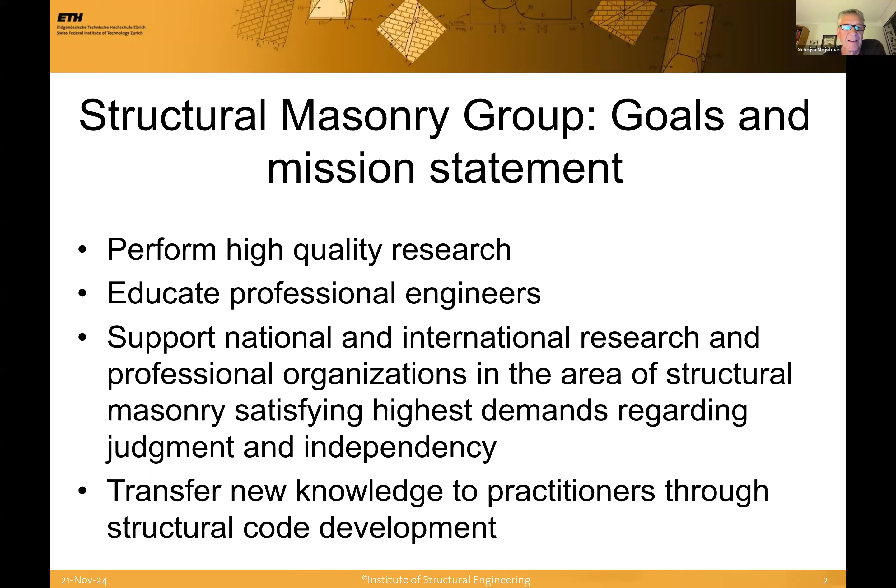And of course, after that, the idea is to transfer this knowledge to practitioners through structural code development and presentations. The major research projects done in this group are deformation capacity of structural masonry, reliability of structural masonry, hybrid testing, advanced measurement techniques, and the topic I'm going to talk about in detail: development of soft layer for seismic response modification of structural masonry.

So the idea is to apply some modification approach to unreinforced masonry structures, typical for Switzerland. About 85% of all masonry structures are unreinforced in Switzerland, because only one part in the west of the country could be earthquake prone, a little bit more than very small accelerations.

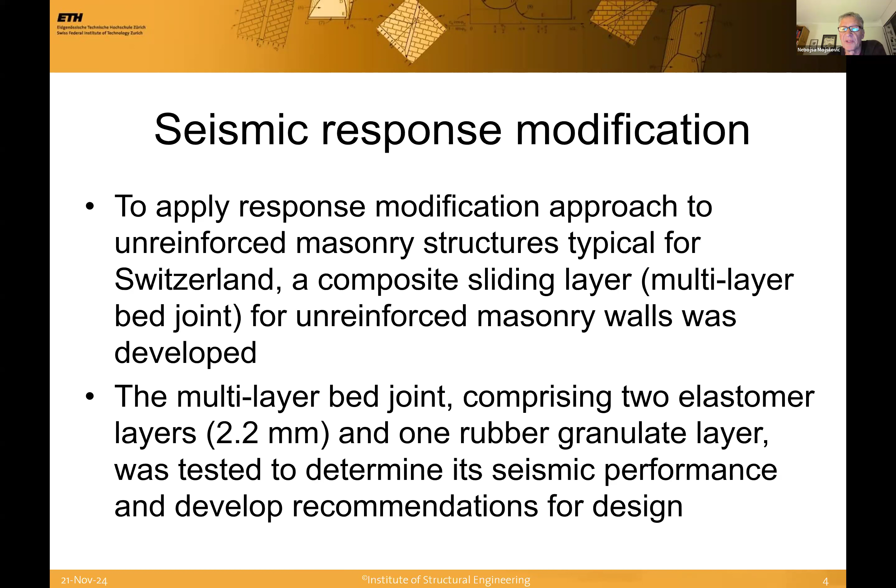So we developed a composite sliding layer, which we call a multi-layer bed joint. This multi-layer bed joint comprises two elastomer layers, 2.2 millimeters thick, and one rubber granulate layer placed between them. Then we did a lot of tests to determine the seismic performance of this layer and of course the whole structure, and tried to develop recommendations for practical design.

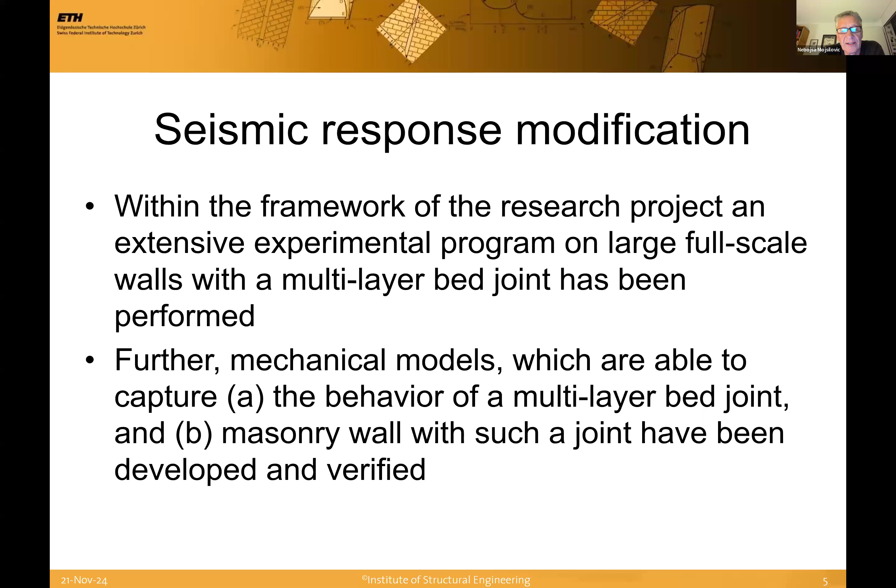We did a lot of tests on large full-scale walls, small walls, and triplets, everything you can imagine. This testing was financed by the Swiss National Science Foundation. Professor Stojadinović and myself were co-investigators. We got money for 4 years, so we were able to also develop some mechanical models that can describe the behavior of this joint and the behavior of the wall with the joint.

So now I will go into detail on this testing. I will speak about materials, the program of testing, results, discussion, and conclusions. All this can be found in a publication in Engineering Structures in 2017. Most of this work was done by Dr. Miloš Petrović, who is now working in a design company also in Switzerland.

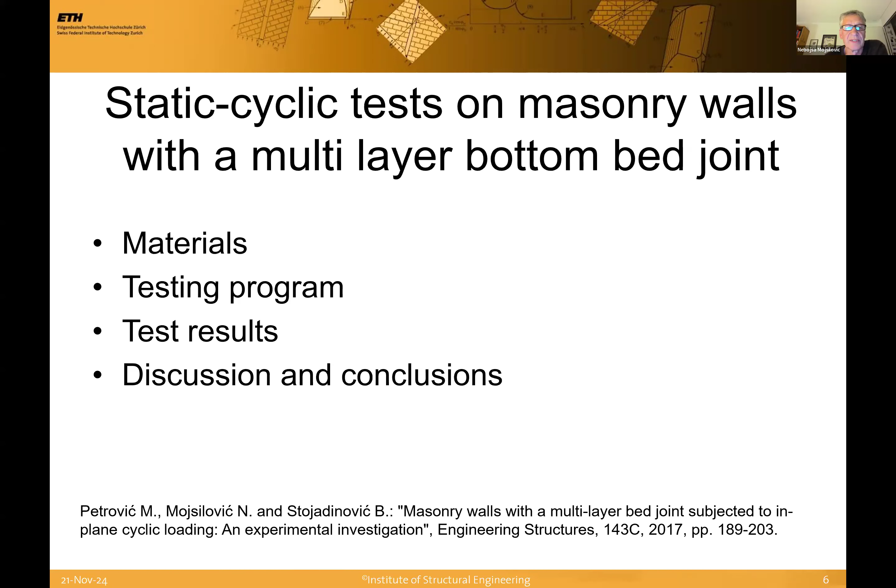The materials we used are standard clay blocks. You can see here the picture typical for Switzerland. We have about 45% void area, and clay blocks are used in maybe 80% of all applications. A small part uses calcium silicate blocks, and a very small part uses concrete blocks, used in the western part where earthquake accelerations could be larger than in other parts of Switzerland.

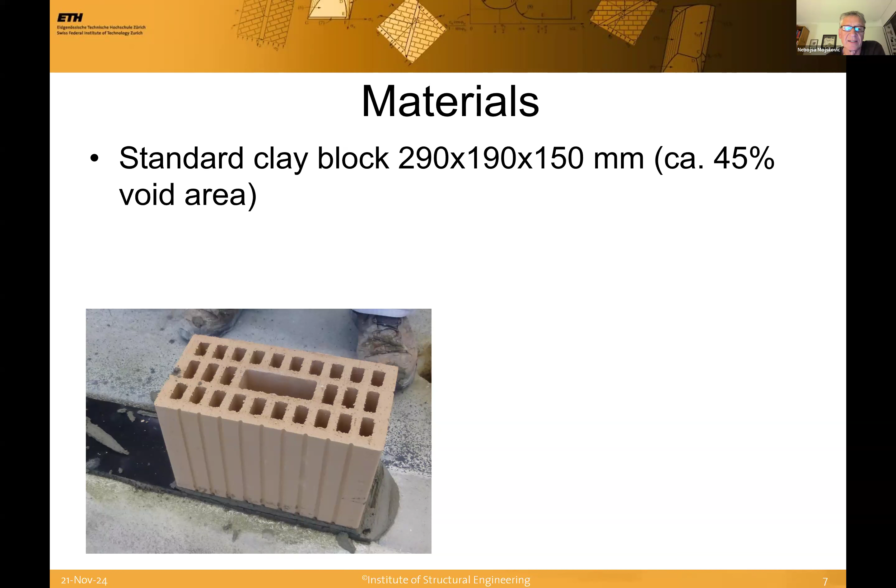Then we use standard cement mortar, always filling bed and head joints, with thickness usually 10 millimeters. In contrast to other countries in Europe, in Switzerland we use exclusively standard cement mortar, so there is no addition of weaker elements in it.

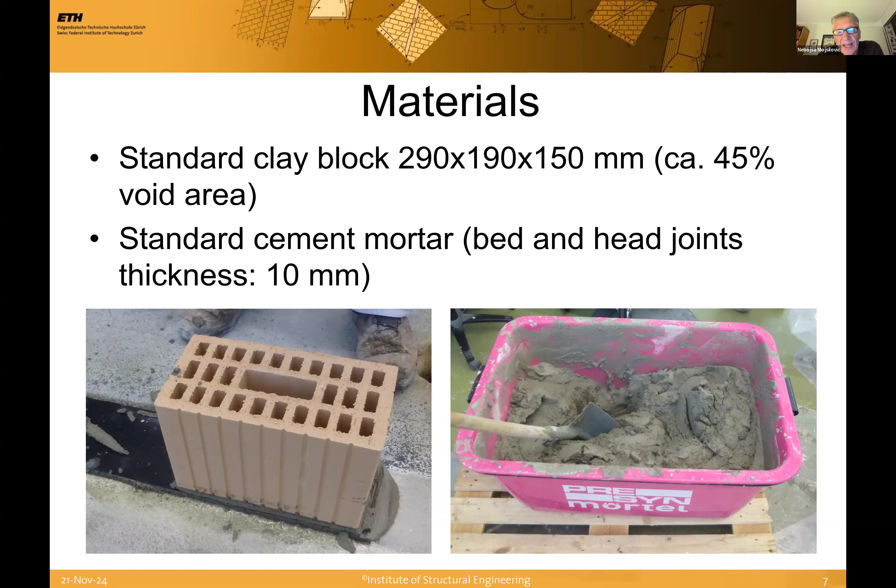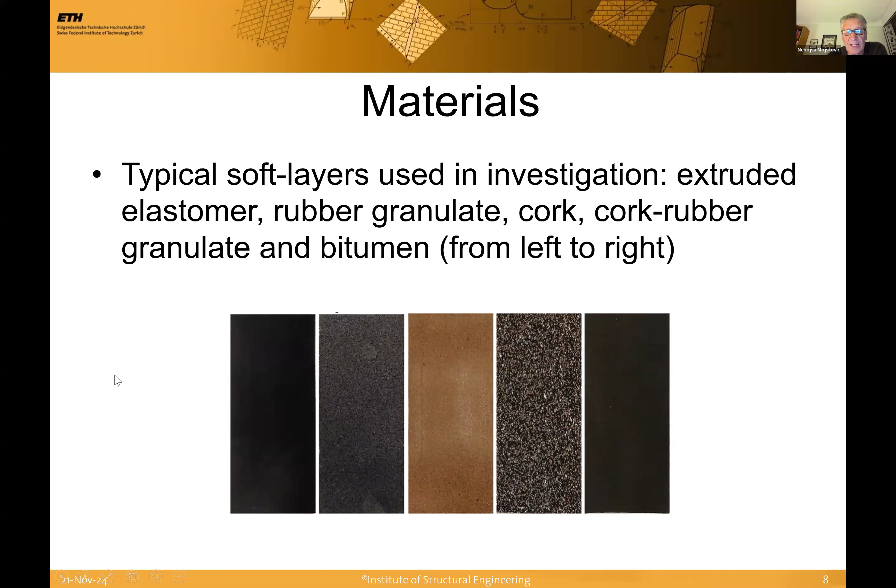So these typical soft layers that we use are, looking from left to right: extruded elastomer, then rubber granulate, then cork, then cork rubber granulate, and bitumen. So we tested all of them in order to find out which one is actually the best for our purposes.

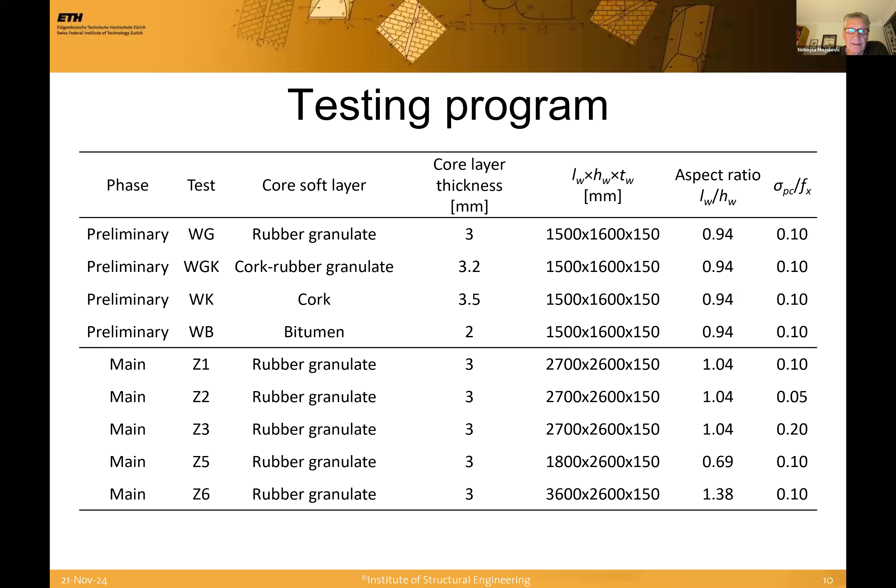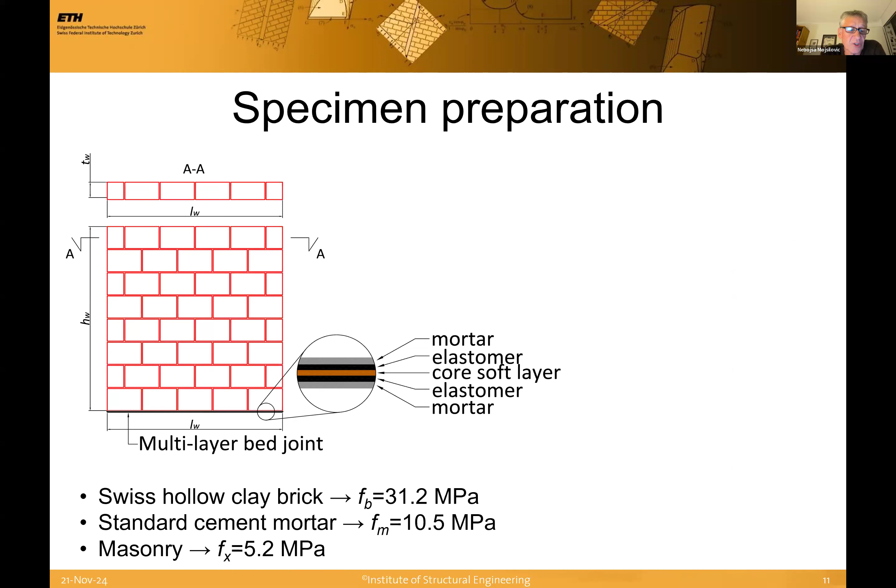So this slide is showing how we prepare these specimens. This is what we already actually seen. What is interesting here is that having a hollow clay brick, the strength of the brick was 31.2 megapascal. The strength of cement mortar was 10.5 megapascal. And at the end, one gets actually the masonry compressive strength of 5.2.

This is how this is actually done. First, you put a layer of mortar, then these 3 elastomer and core soft layer sheets, and then again mortar, and then the bricks. These are the 4 soft layers that we tested, which I already mentioned before.

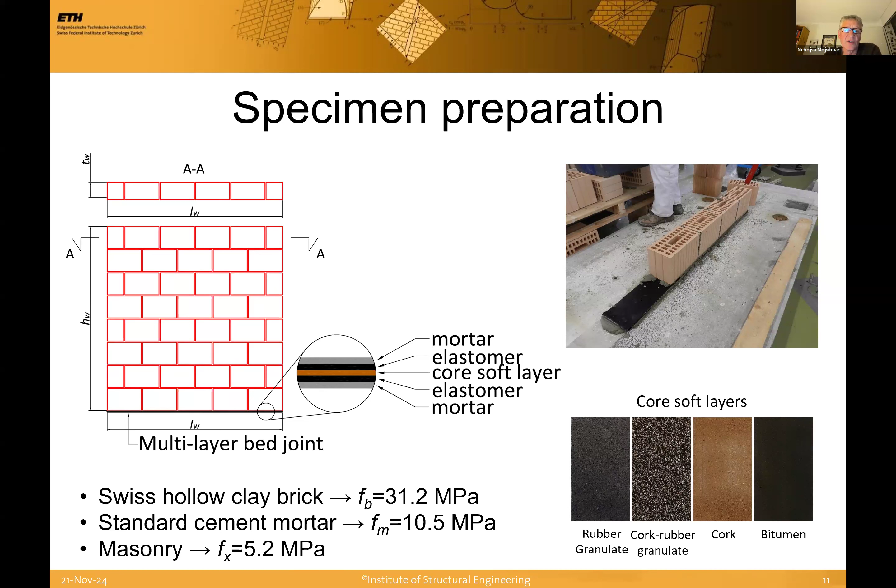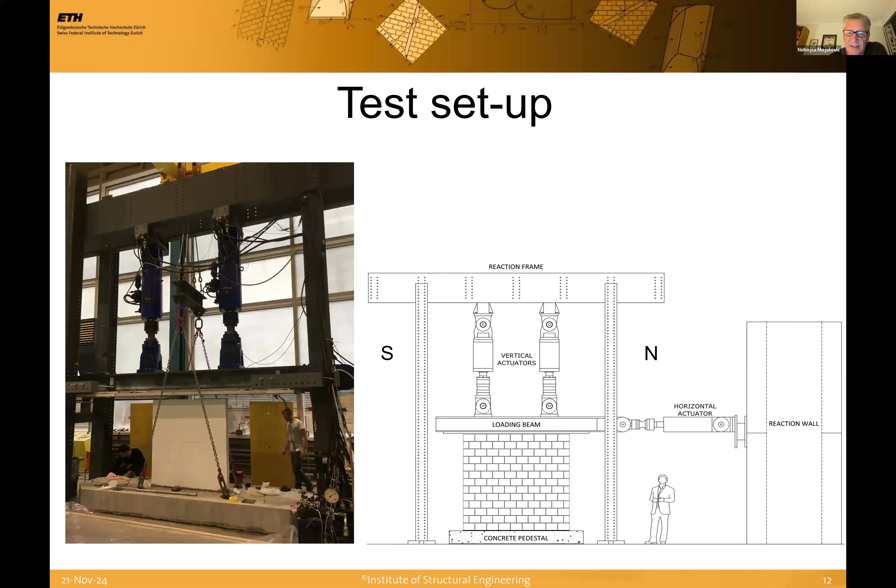So they have to equilibrate this horizontal force times the height of the wall, this bending moment. So, as I said, first we pre-compress the walls, then we introduce this static cyclic shear load that was computer-controlled displacement with a sinusoidal waveform. We introduced every step 3 times. We simulated fixed end boundary conditions, and used a two-dimensional digital image correlation measurement system to obtain the deformation field of the specimen.

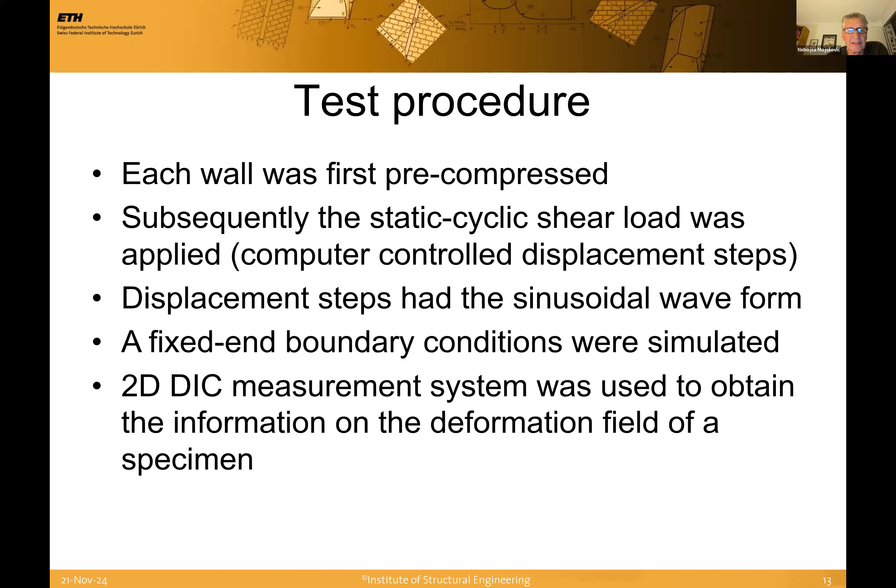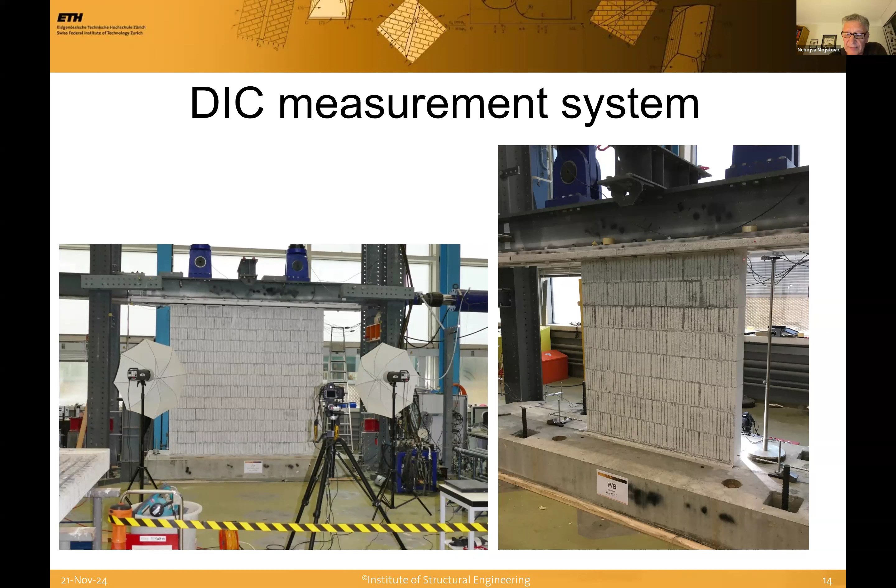So this is this DIC measurement system that we developed in-house. You have a camera, as you can see in this part here. On the left side, we have flashes, and we put some randomly distributed speckles on the wall surface, so that we can follow the change of the deformation, that means the position of these points on the photographs. You can also do the large wall with that, and also check the movement between this bed joint and the bricks. So very fine measurements can be done with this system.

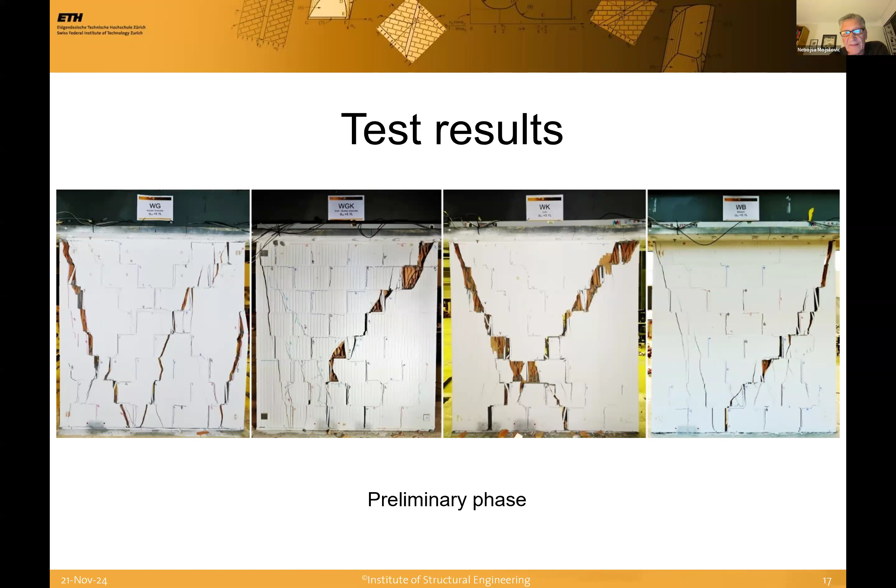Before I forget, in the framework of the other research project, we also did the same test on the same walls with the same material, but without soft layers. So we have a series of tests on the large walls, denoted as T, so we can compare them. But first go here.

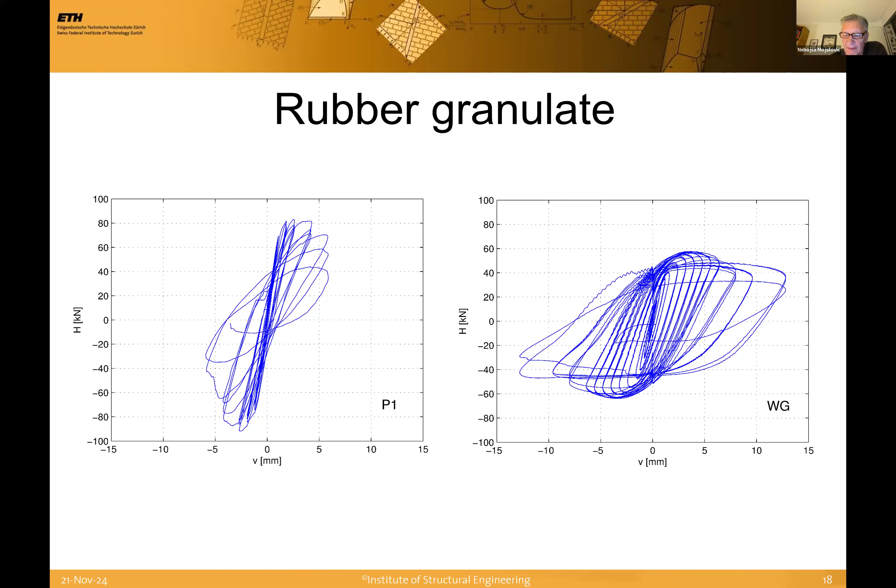So these are now the results of the main phase. As I mentioned before, we have here two series of walls. T1, for example, is the same dimension and material as Z1, but without soft layer.

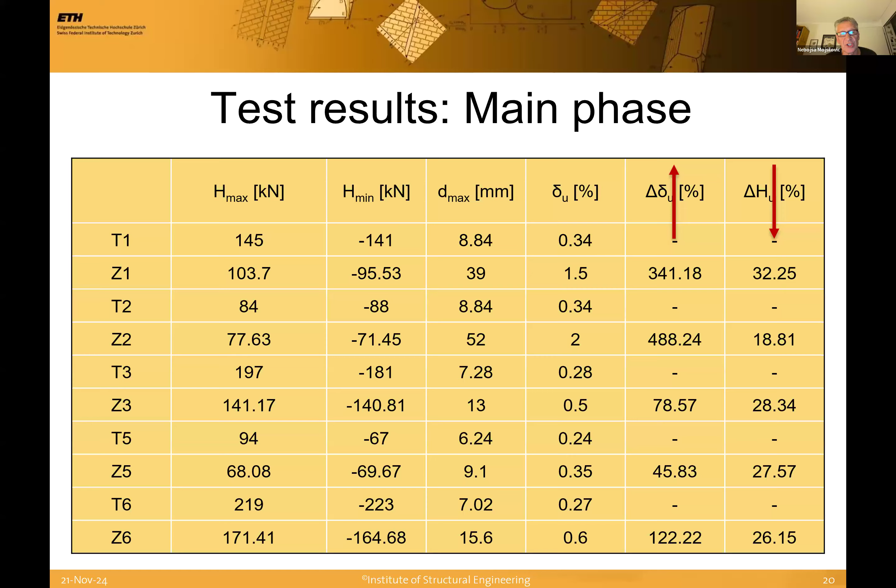So in this case also, this is going up, and the force that can be achieved is going down. That's the similar situation as before. And these are the failure modes.

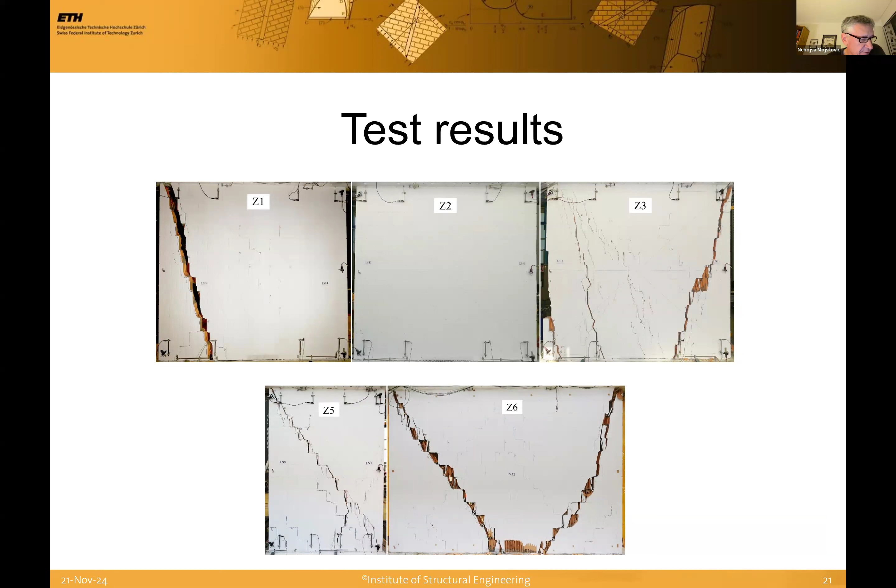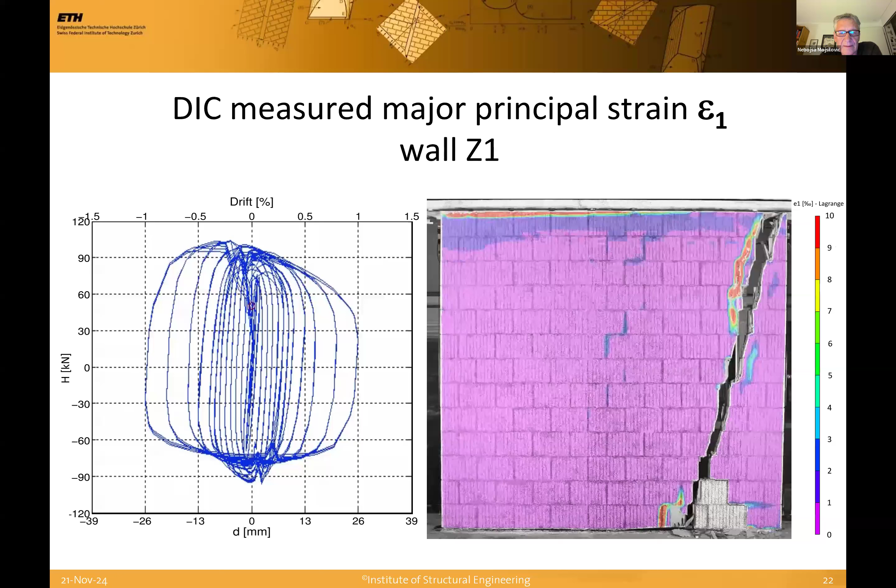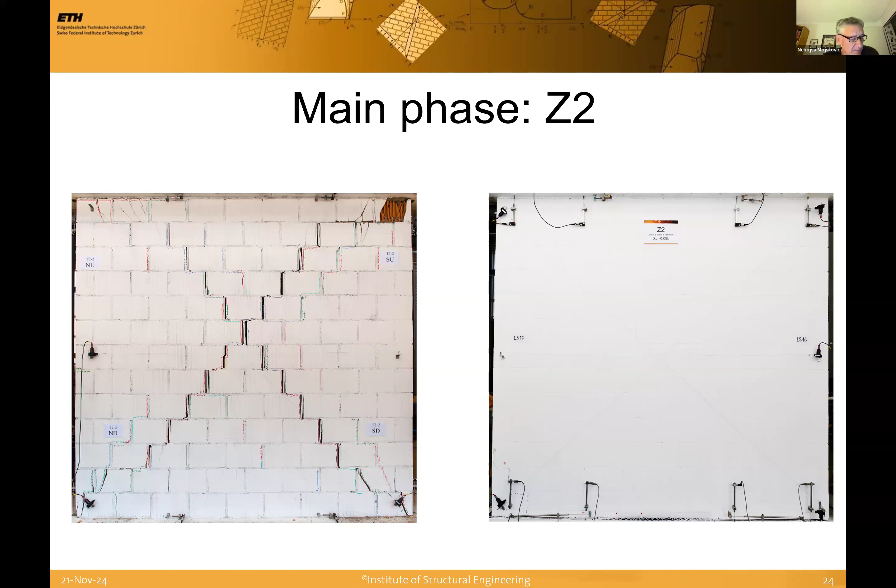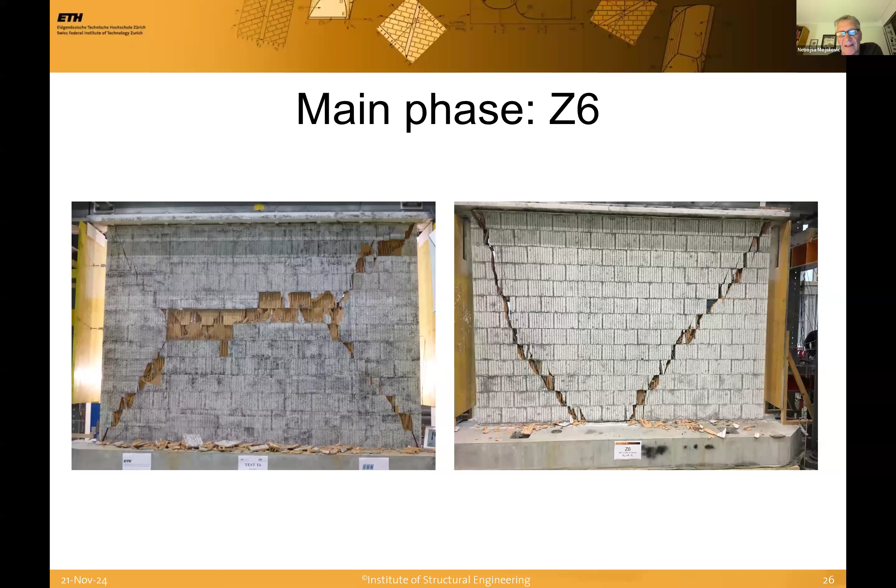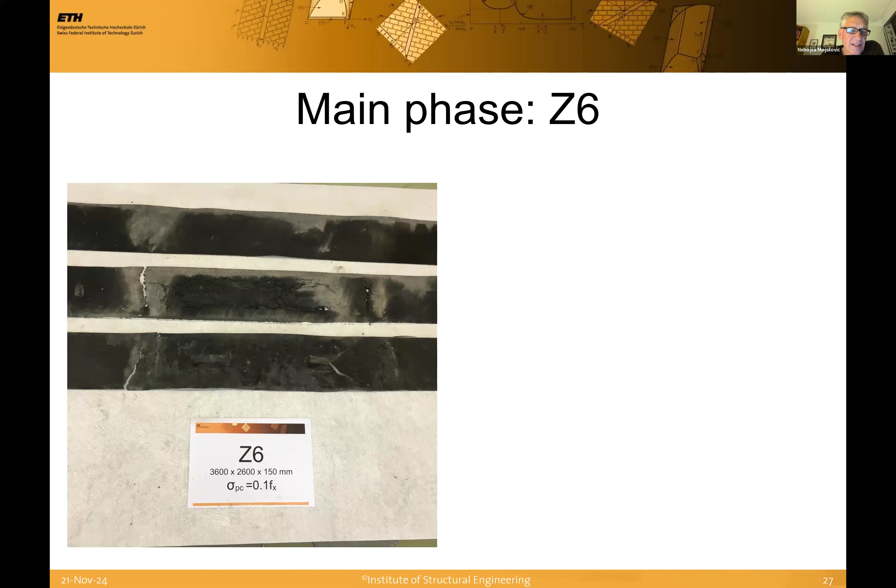When we took the wall out of the setup, we could inspect these joints, and you can see them here. The middle one is the granulate, and upper and lower are actually extruded elastomer. Here that's given in detail. So actually in this case, we also had the elastomer layer that should protect the middle one also failed here in tension.

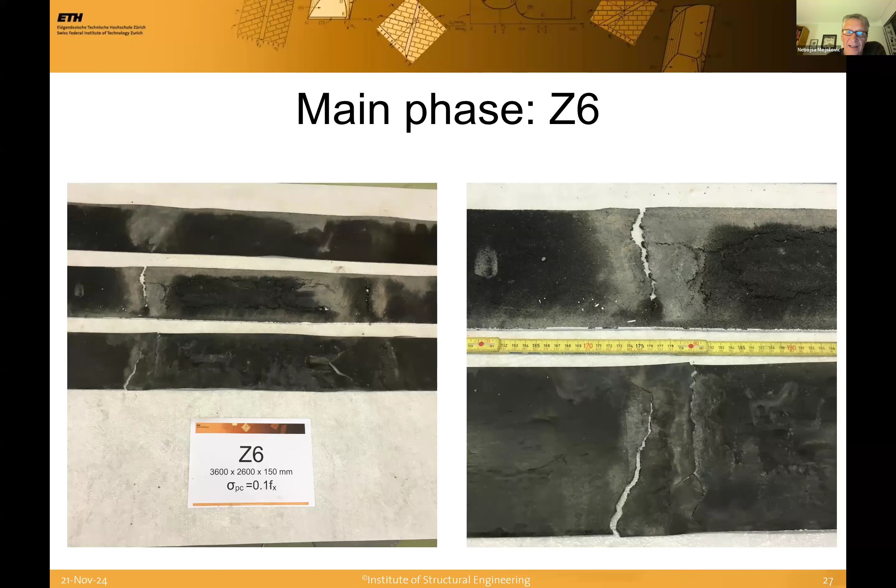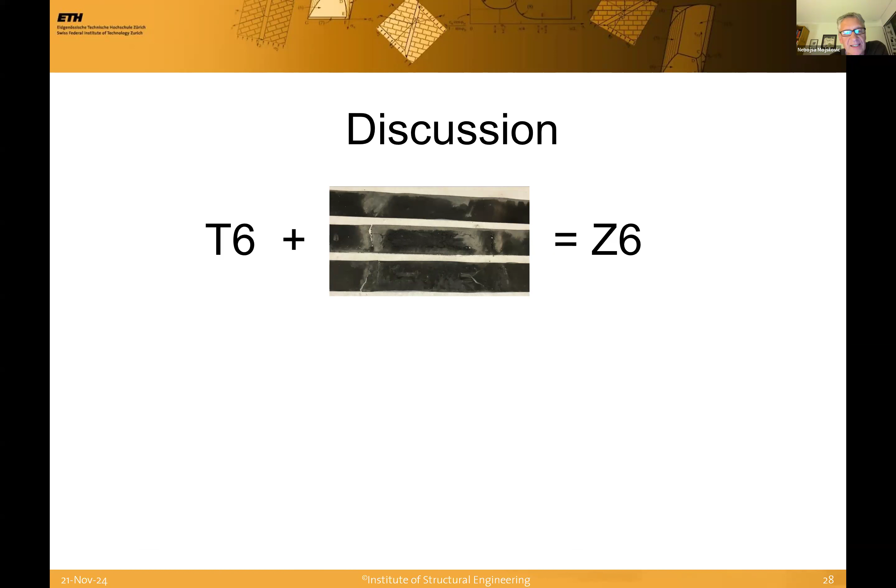So in discussion, I think this is actually a very interesting thing. When you connect the wall T6, that is without any layers, plus layers, you get wall Z6. And then instead of the system that we had, so double fixed wall, and then we have this X-type failure, when you introduce these layers, you actually get, let's say, a half of the wall T6. So that means you have fixation on the top part, and on the middle part, you have actually the horizontal joint.

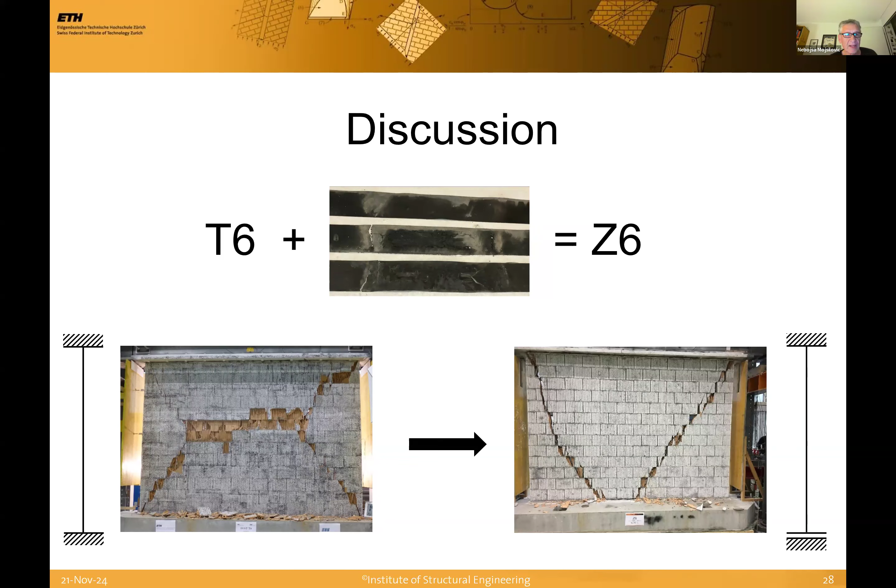The idea to do this project was that the people building in Switzerland are putting these layers as sound insulation or waterproof layers, and they don't think of them as something that is going to modify the earthquake response. So we checked all that. For example, if you check the shear strength, if you put these layers between the wall, you can get a 10 to 15% loss in the strength. So nobody took care about that. So we decided to invest our time to see what is actually happening with all that.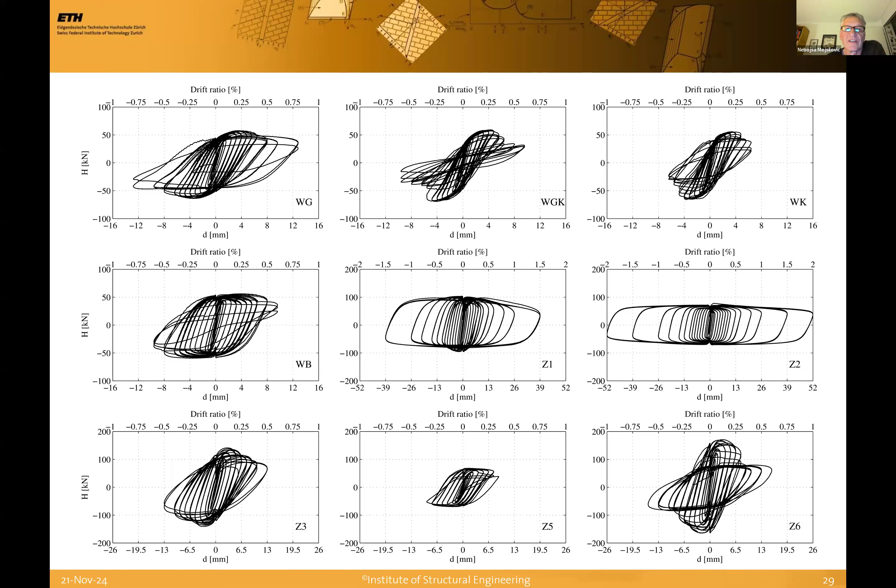This came out, which is actually very good, especially for Switzerland, where you don't have such large earthquakes. So in conclusion, we can reduce the initial stiffness by about 20 to 40%. Then we reduce the horizontal resistance by about 30%. And we increase the deformation capacity, which goes up to 6 times higher. And we can increase, of course, the energy dissipation.

In general, this seismic performance is improved in that we delay the significant strength and stiffness degradation. We enable sliding motion along the multi-layer joint. Once more, it's important that this cannot go on infinitely, but other parts of the building would stop that. And last but not least, you can enable the quasi-ductile behavior of structural masonry.

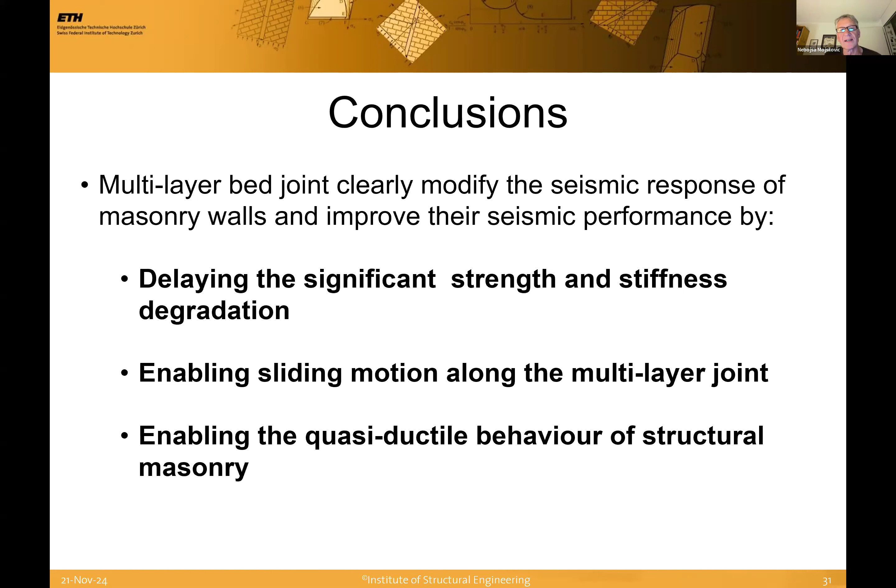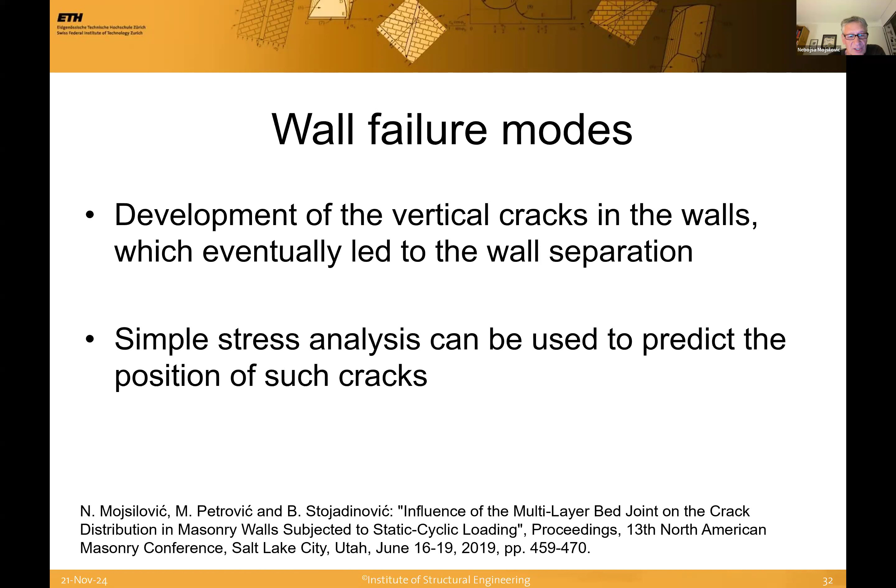So that was the part with the testing, and then we did some analytical modeling. We tried to find some model to predict the wall failure modes, meaning to see where these vertical cracks are appearing, because they eventually lead to wall separation. We used simple stress analysis and found that it can really work, which was not so expected. We start with the typical stress distribution for linear elastic behavior, because we could have the moments on the top and the bottom of the wall.

Then we have the linear distribution of the normal stresses, and we also assume that the shear stresses are parabolically distributed over the wall, which is the typical assumption that we use in linear elasticity.

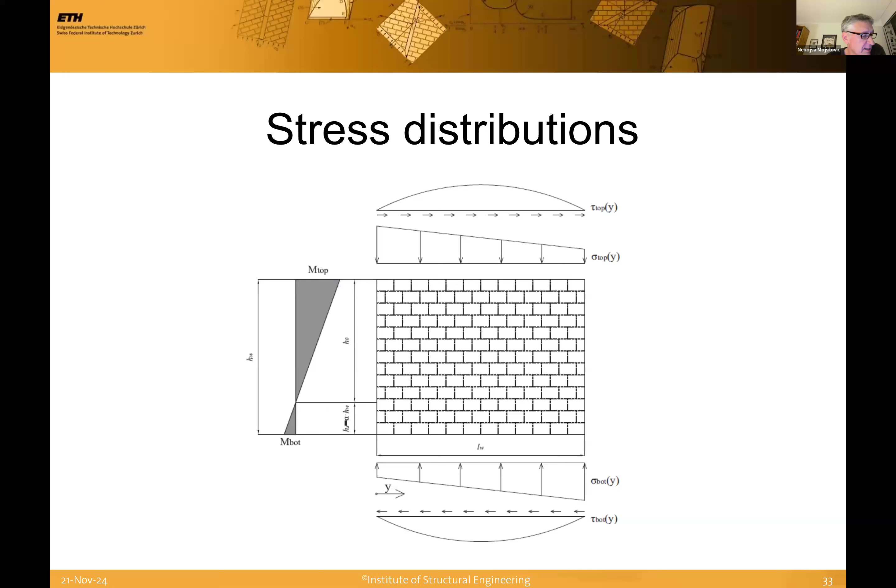So we have here the governing equations, the stresses at the bottom, the normal and shear stress are given by these equations, and when we integrate these stresses, we can get the resistance force that is denoted with R, which is a function of the position of the wall. Y is the axis that is going horizontally, and we also have demand force, which can be calculated through integration over the length of the wall. So for demand force, we integrate the stresses, and for resistance, we use cohesion and the angle of internal friction.

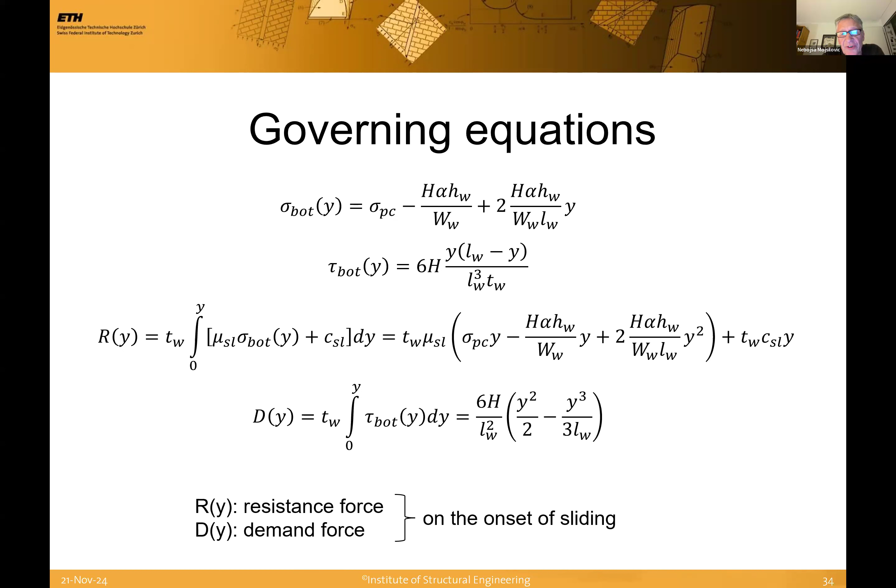When we calculate that, then we can predict where we could have these cracks. So on this diagram, the example for wall Z3, we take the movement from left to right. This is the load, the shear load direction. And at the point where the demand is larger than resistance, we should get the crack.

This is given here for wall Z3. So the tensile stress location should be between blocks 2 and 3, as can be seen from the diagram. For the compressive stress location, we get the positions between blocks 7 and 8, and 8 and 9. So that is the prediction.

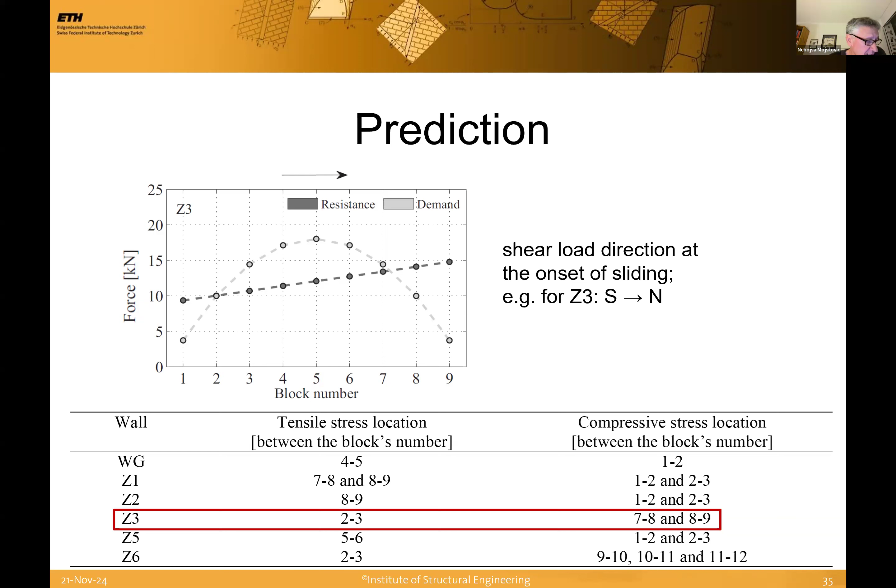And of course, we could check that using our DIC results. This is given here for walls Z2 and Z3. For wall Z2, we predict that the tensile stress location would be between blocks 8 and 9, which is actually the case, as it can be clearly seen from the DIC measurement.

For wall Z3, the tensile stress location was between blocks 2 and 3, which is also correct. The compressive stress location for wall Z3 was predicted as 7 to 8 or 8 to 9, and it was actually 7 to 8. For wall Z2, it was between blocks 1 and 2, and 2 and 3, which is not clearly seen here, but it is almost at block number 1.

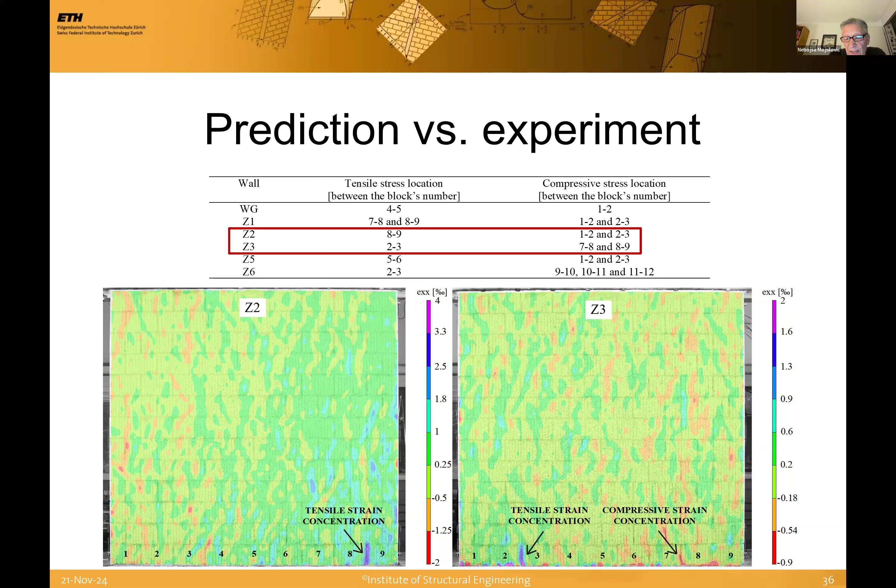So this failure mode and displacement capacity of masonry walls with a multi-layer bed joint were governed by the extent of shear and tensile vertical cracks that developed from the bottom course. The initiation and propagation of the vertical cracks eventually led to disintegration of the walls, meaning a reduction of the effective shear-transferring wall area.

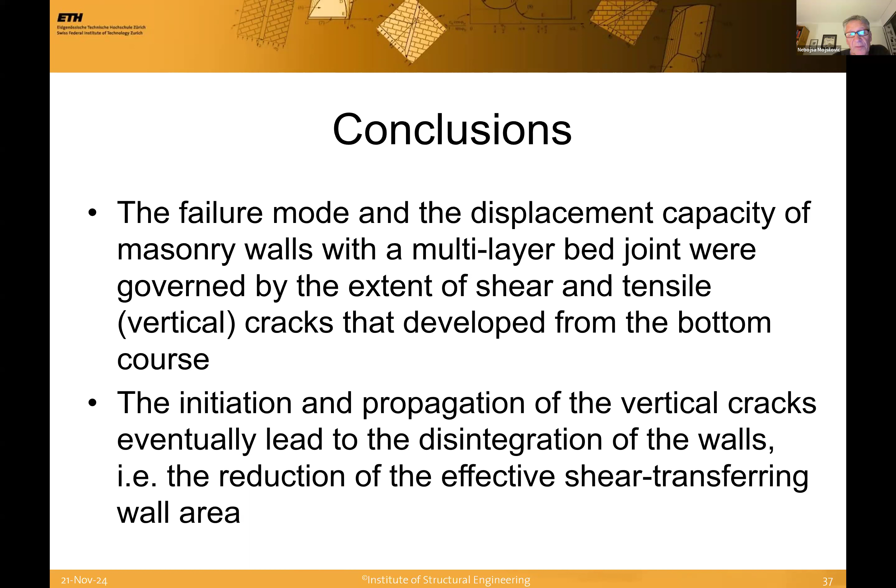So we developed a model capable of predicting the position of these cracks, and that was validated through these experiments. And this is self-explanatory, but these days it's always important to say such things.

One of the recommendations from this study is that engineers must carefully consider the distribution of the shear stress along the bottom of the wall. In my time when I was a student, nobody would say something like that, but now when I'm teaching other people, I know I have to mention this, otherwise...

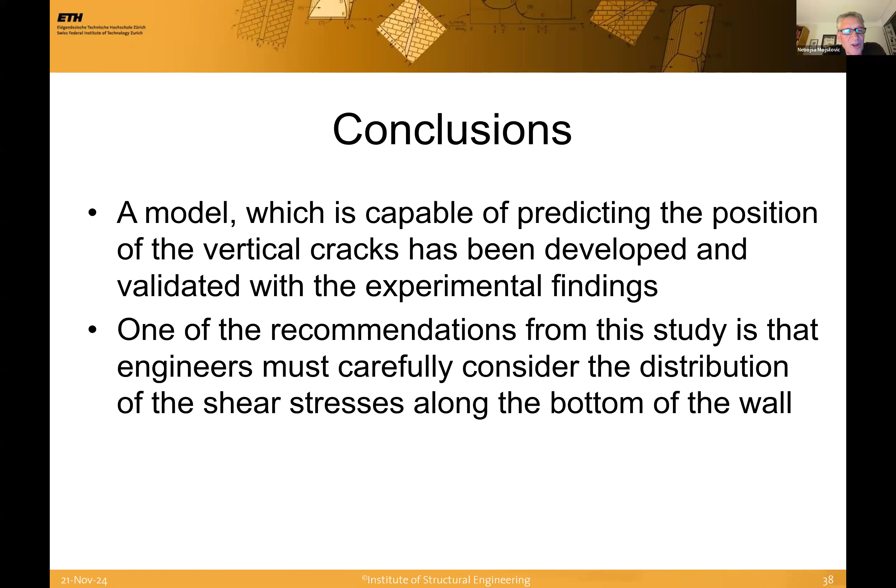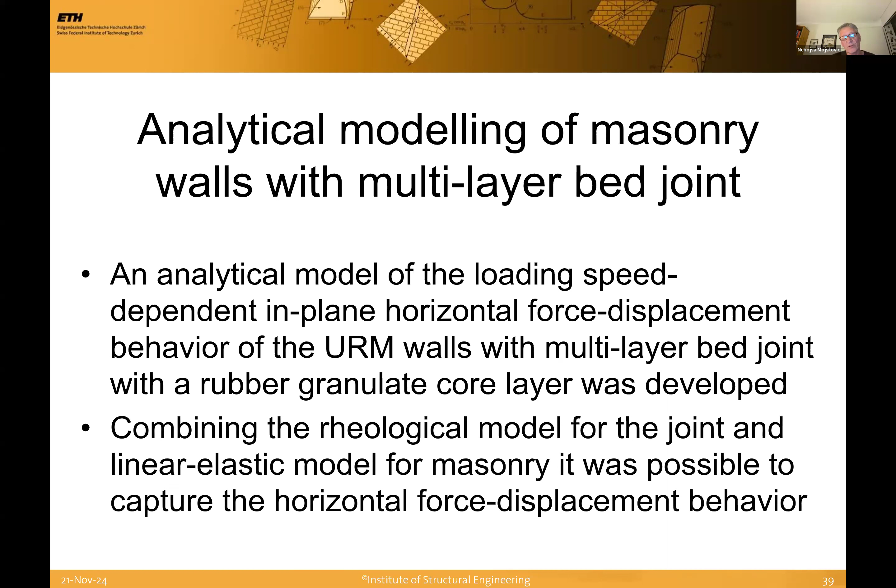After this, we did some more mechanically complicated models. First, we tried to develop an analytical model for the loading-speed-dependent in-plane horizontal force displacement behavior of the walls with multi-layer bed joint with the rubber granulate core. We combined the rheological model for the joint and the linear elastic model for the masonry, and in that way we could predict the behavior of the walls.

So this is the typical rheological model, a viscoelastic model comprising a spring, which is characterized by the shear modulus. Then on the upper part we have a dashpot, characterized by this parameter zeta, which is a loading-speed-sensitive viscosity parameter with a dimension of time. And on the lower part, we have the frictional slider, characterized by tau y, the sliding resistance.

I'm not going into detail here, but at the end you get the dependency of the shear force and slip. H is the shear force, D is the slip, and the dot is the slip rate, of course. This delta TML is actually the thickness contraction due to vertical forces.

And we also introduced this parameter psi, which actually characterizes the stiffness degradation through the cyclic testing.

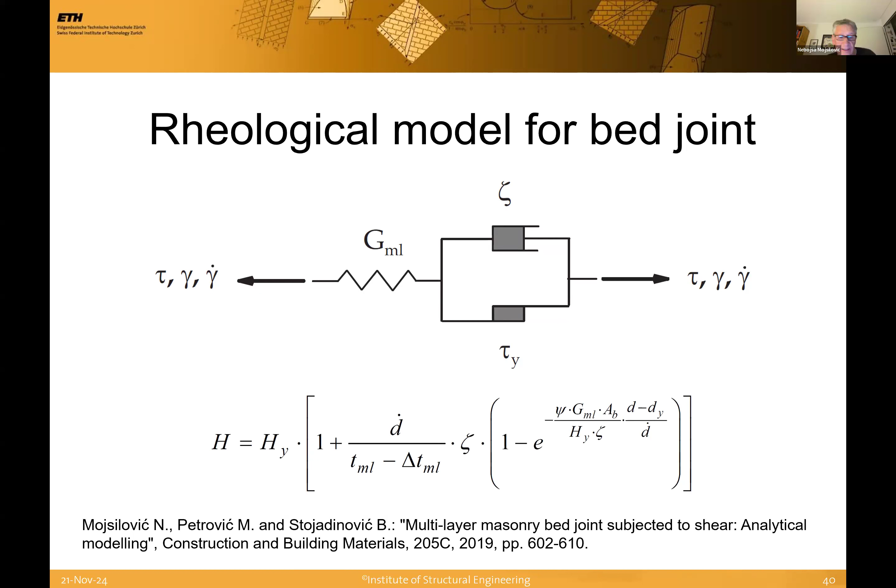The important thing is to actually see which part of deformation can be attributed to shear, to flexure, to shear of the joint, and to rocking.

And for that, we need this - not an equation, but just the definition of the elastic stiffness, K_el. We have four parts. The first part has this kappa, which is the coefficient used for the cross section, 1.2 in this case.

Then we have alpha, the zero moment position with respect to the bottom of the wall, used for the flexure part. Then for the shear of the multi-layer bed joint we have the third term, and the last one is for the rocking. And you can see in the table, the largest contribution is, as one can expect, due to the shear of the multi-layer bed joint.

So all these numbers in this table should add up to 100% at the end. I think that should be correct.

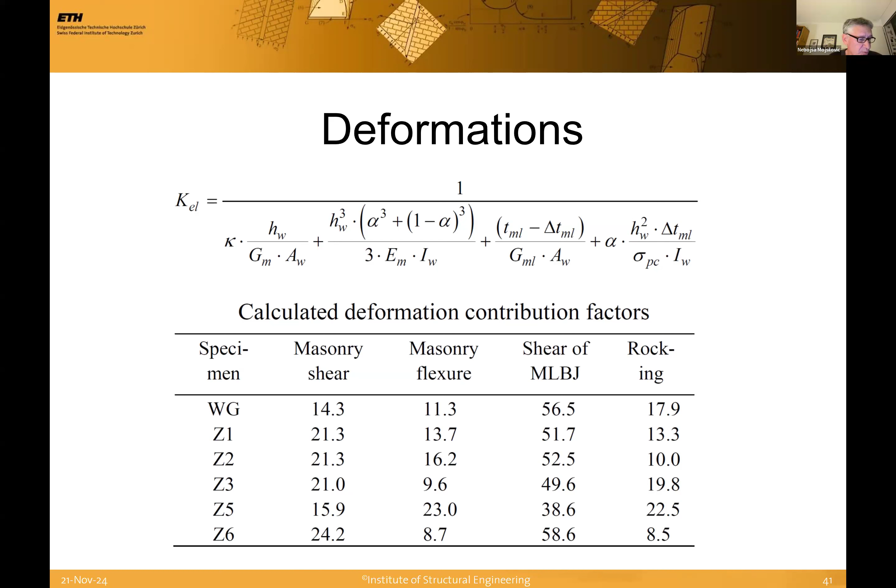So when we take care of the stiffness degradation, which is very important here, you can see on the diagram how this parameter psi 1 depends on the number of cycles. K0 is now the tangent stiffness, which is actually 1.4 times the elastic stiffness that we had before.

But now here we also introduced this stiffness degradation parameter. So it's getting a bit complicated, but all this can of course be calculated with the computer.

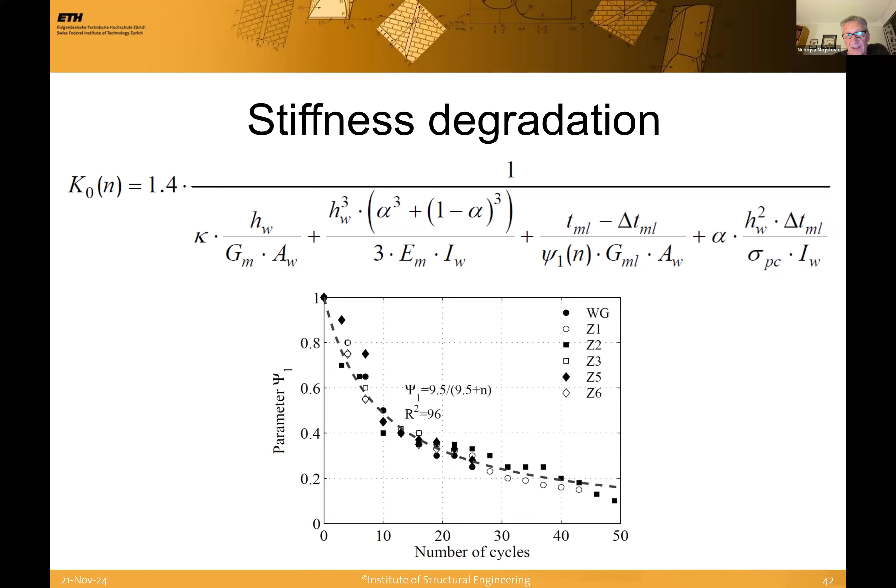This is the model we use to connect horizontal force with horizontal displacement. As you can see, we have a part that is elastic at the beginning, then we use a viscoplastic model, which can only be used for the loading path. For unloading, this model does not work - that's something we didn't succeed in developing. But anyway, I think the prediction is not so bad. For unloading, you can just take the linear elastic, and there will be some difference, but it's not so bad.

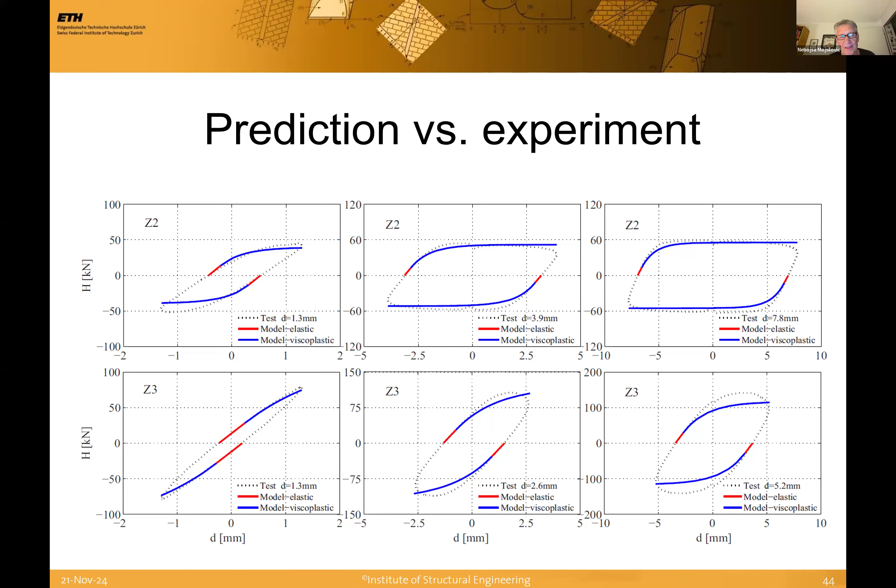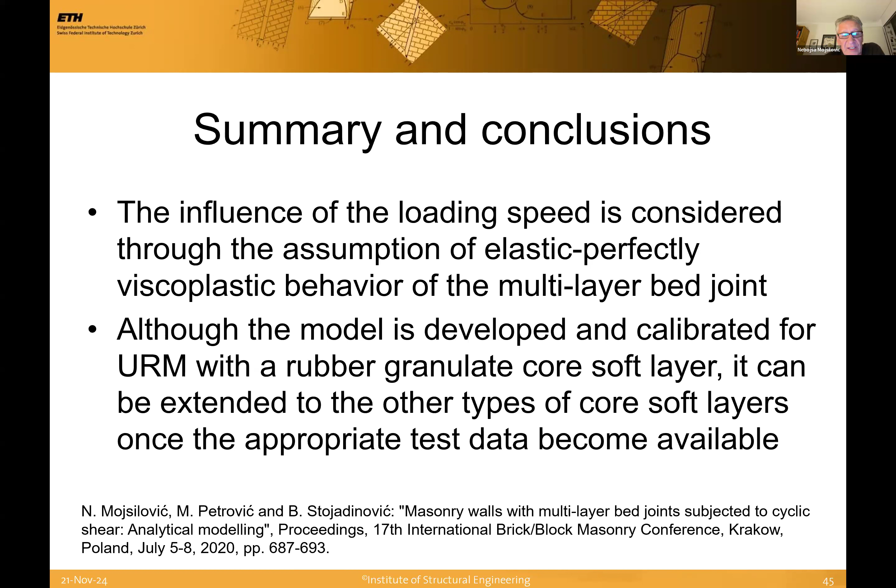In summary, the influence of loading speed is considered through the assumption of elastic-perfectly-viscoplastic behavior of the joint, the multi-layer bed joint. This model is developed and calibrated. This constant C is calibrated through the results for the multi-layer bed joint with rubber granulate core soft layer. It could also be extended if we get results for other materials that could be used as core soft layers.

So this is actually the end of the first presentation. If you have some more time, I can quickly show what we actually did in other projects, maybe two slides per project, something like that.

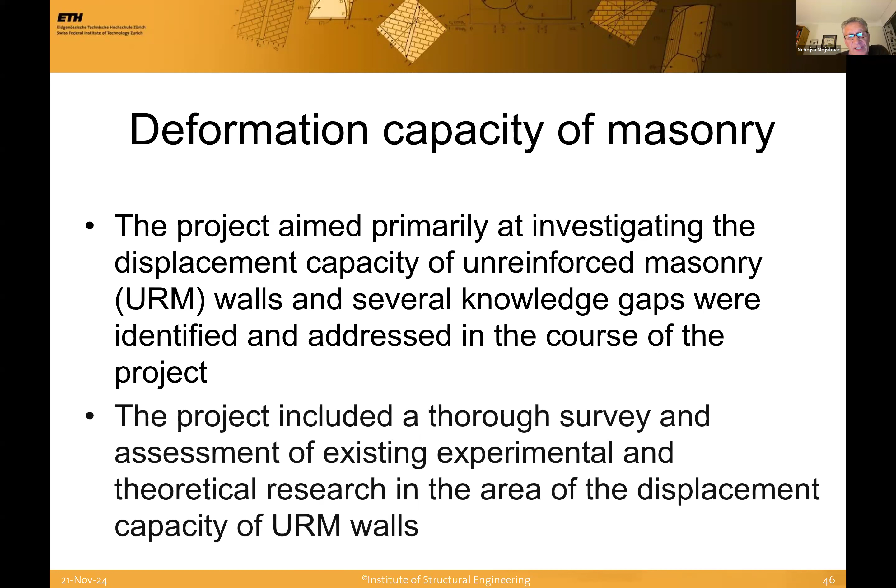The first project, also financed by the Swiss National Science Foundation, was on deformation capacity of masonry. We tried to close some knowledge gaps through this project, and we started with a survey and assessment of existing experimental and theoretical research in this area.

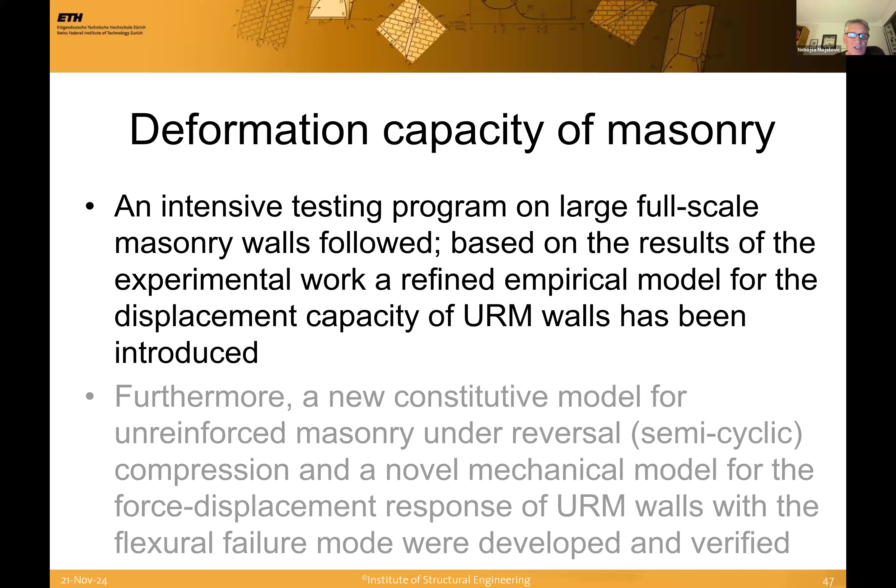Then we did a lot of tests, on big walls, small walls, small specimens, and so on. We suggested some refined empirical model to calculate the displacement capacity of unreinforced masonry walls. This is, of course, only valid for walls made with Swiss materials, because that's what we tested. We also developed some new constitutive model for unreinforced masonry under semi-cyclic compression, and some mechanical model for the force-displacement response with the flexure failure mode.

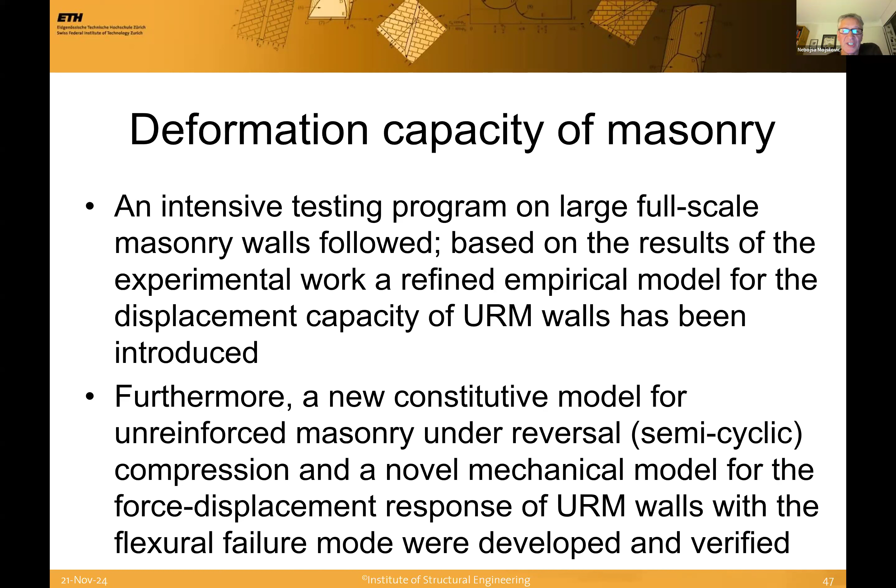What we didn't succeed in here is developing a model for shear failure, and to my knowledge, that is still an open problem. Also in this case, I don't want to go into details. What I want to pick up from this project are some interesting things I call the beauty of nature's laws.

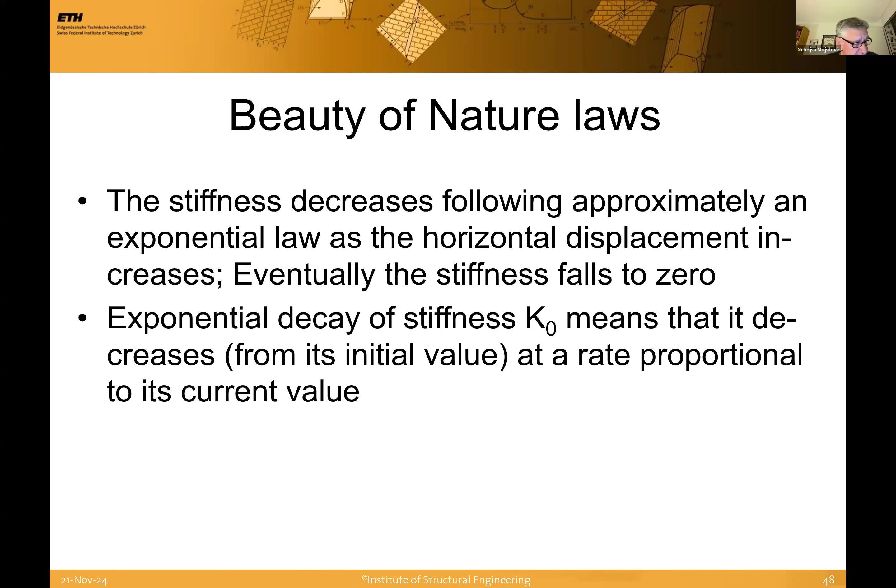What we found out is that the stiffness during this cyclic loading decreases following approximately an exponential law, and eventually this stiffness falls to zero. This exponential decay of the stiffness, K0 being the stiffness at the beginning of the test, means that the stiffness decreases from its initial value at a rate proportional to its current value. We can write the differential equation and integrate it. λ here is the exponential decay constant, and K0 is the initial value, which we can get from the results. When we put that in diagrams, we can see it's actually a very good prediction.

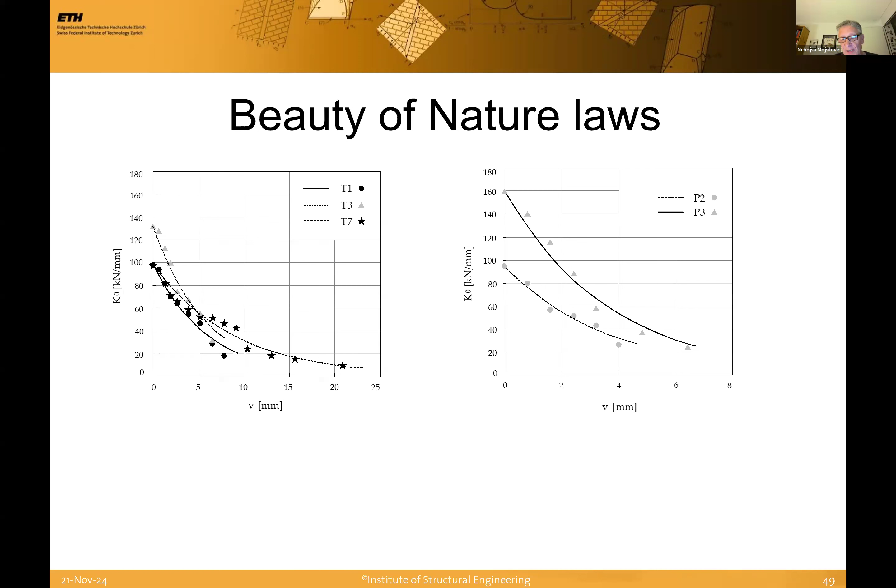Of course that's just a numerical thing, but what is interesting is that similar decay processes occur in nature, for example radioactive decay, and also in engineering sciences, for example vibrational decay in damped oscillators. All these processes can be described with this same differential equation.

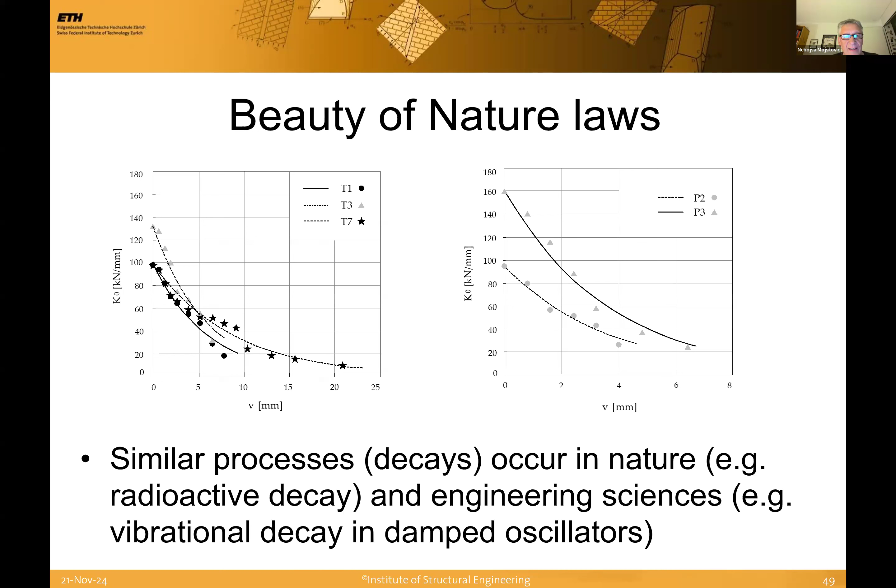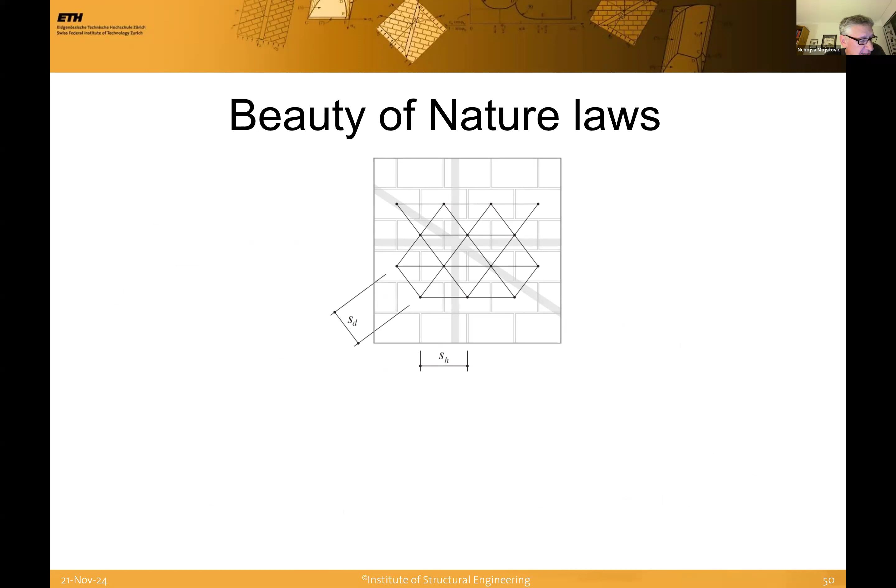The second thing we noticed and used: this is a typical measurement mesh for a small specimen, made of triangles, and we measure the changes in distance between these net nodes. In order to correct measurement errors, which are always present, the analogy between the principle of minimum sum of squared errors and the minimum of elastic strain energy was used.

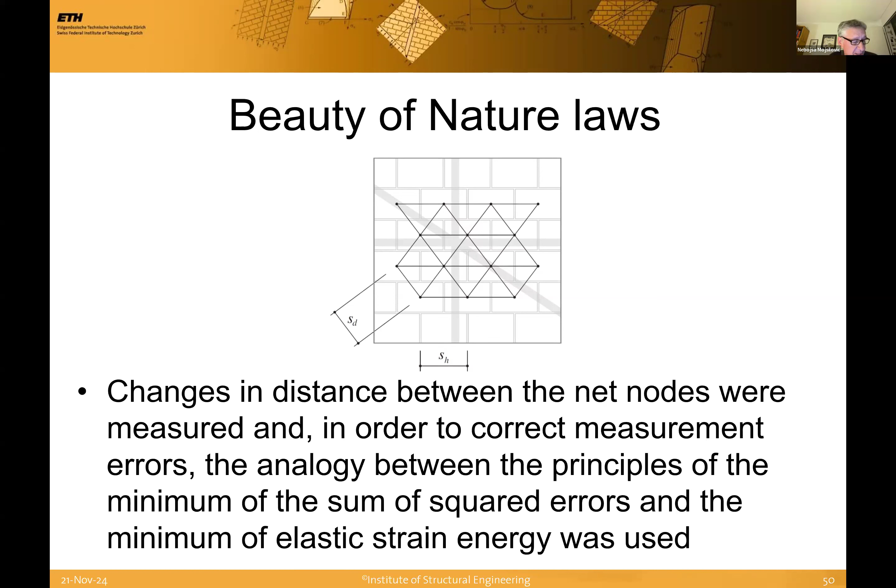And this is how it can be done. We can use standard finite element software where the measurement net was modeled as statically indeterminate plane truss - if it's not statically indeterminate, it won't work. The truss members' length changes were applied as a loading, and in this way the nodal displacement could be obtained. Of course, you have to put some supports, otherwise that won't work. So it's relative to these supports that we choose.

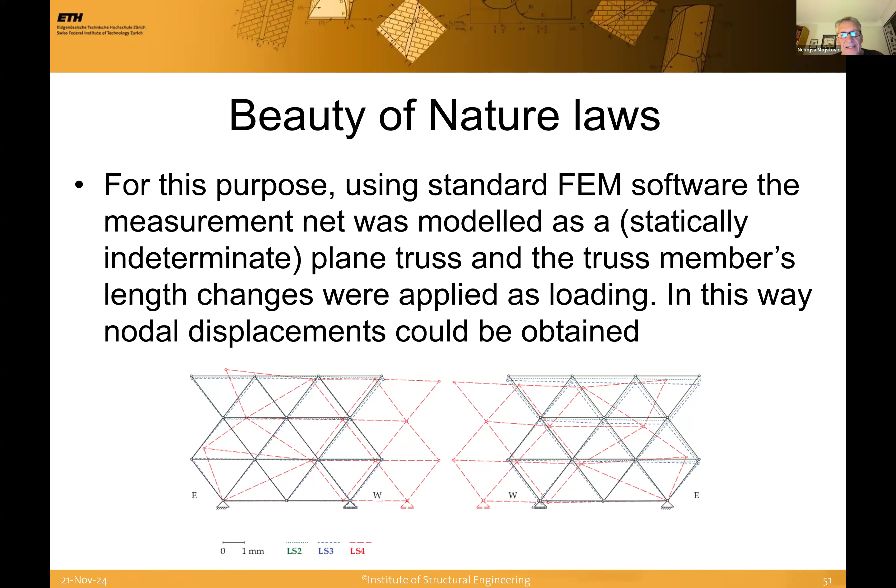The next thing that could be interesting is the reliability of structural masonry, and our group was doing that for a long period of time. So we firstly developed a probabilistic model framework for design of masonry. Then we used Bayesian assessment of the compressive strength for the masonry. We checked the probability and structural reliability assessment of mortar joint thicknesses in load-bearing masonry, and we also investigated the influence of workmanship on the compressive strength of structural masonry.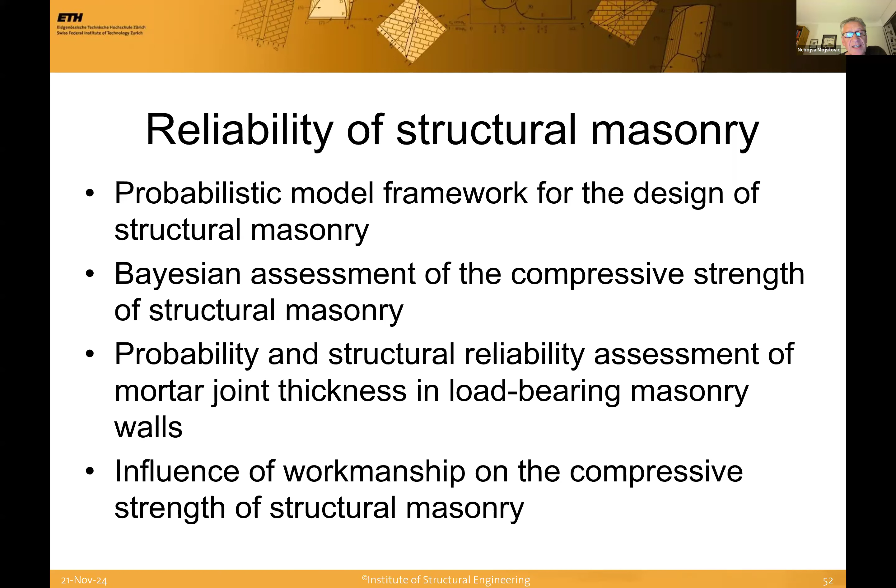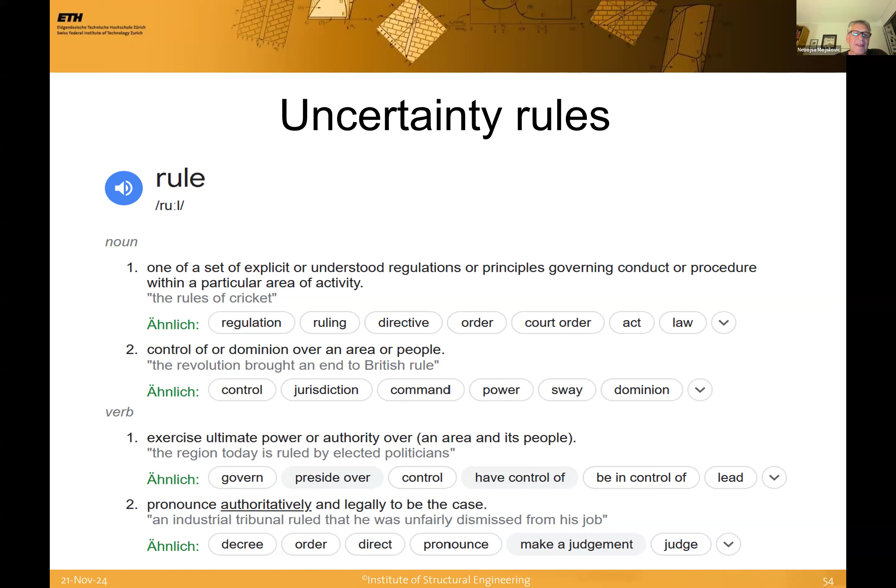So the other thing we found out is what uncertainty can do, or how uncertainty can change the behavior of the masonry. I just titled it Uncertainty Rules - rules meaning the first explanation from the verb: exercise ultimate power or authority. And that means the following.

As part of the structural masonry course, which I did in Zurich, during one lecture of about 1.5 hours, the students are divided into small groups and they build some typical specimens. At the same time, we have two professional masons who instruct and help students during the exercise, and they also build one specimen.

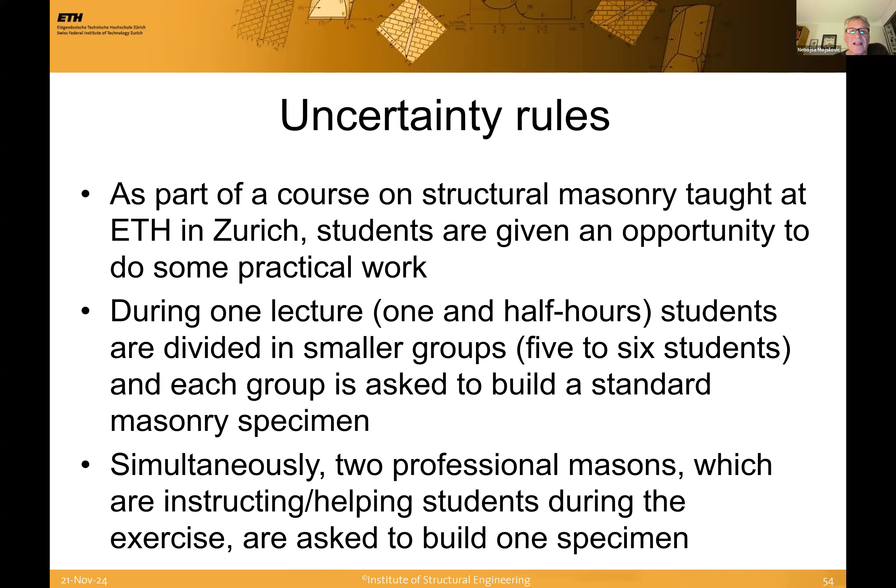After 4 weeks we test that, and these are the results of these tests for actually 11 years, from 2007 to 2017, and these walls were mostly clay block masonry. You can see in this diagram the values achieved by masons.

With the gray color, and others are the students' results. Depending on the year, at the beginning there were not so many students, so we have a smaller number of specimens. Then in years 2015 and 2016 we have really a lot of students, and then we have, of course, a lot of specimens.

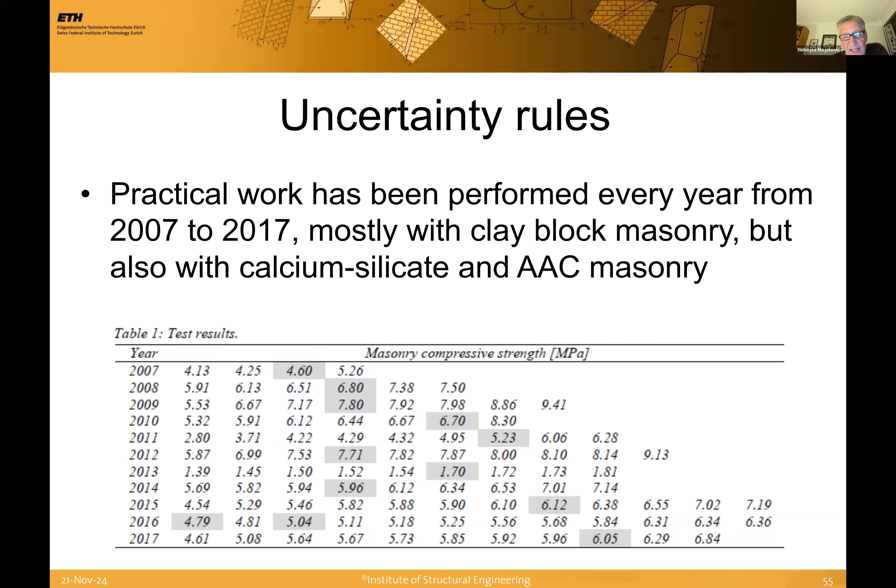And what is interesting here is that the specimens built by students sometimes actually get higher strength than what the masons are doing.

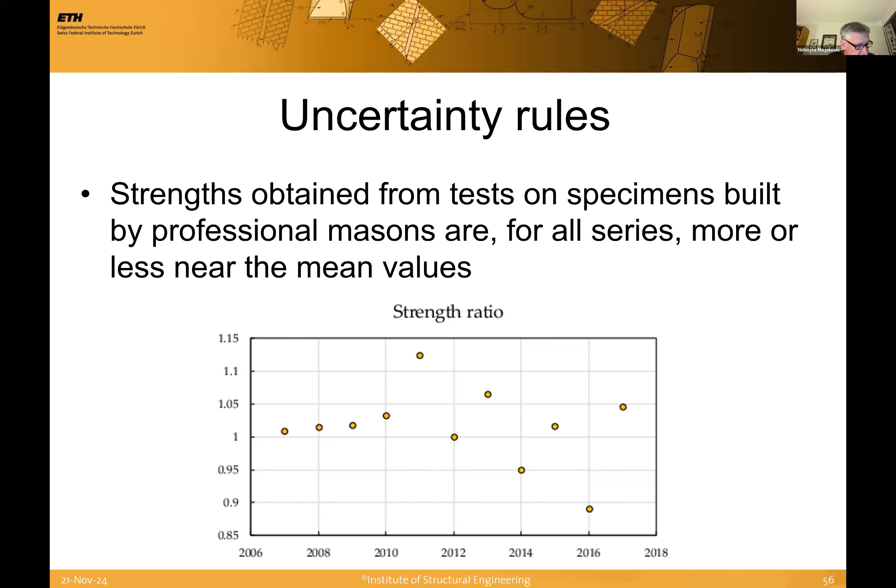So this is the comparison, the strength ratio, between the values of the walls built by masons divided by the sample mean. It is more or less between 0.9 and 1.1. That means the strength of walls built by the masons was almost equal to the average value of those built by students. In the course of these 11 years, professional masons could not outperform unskilled students.

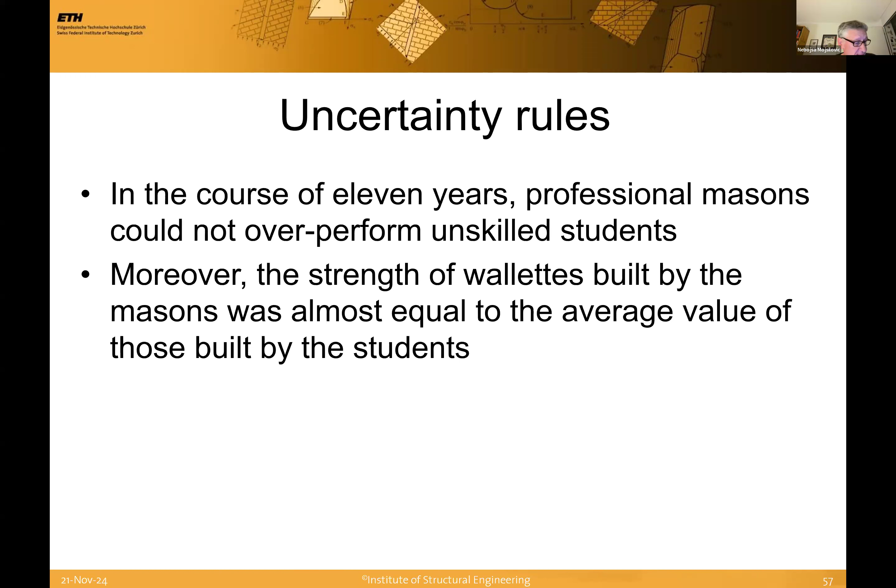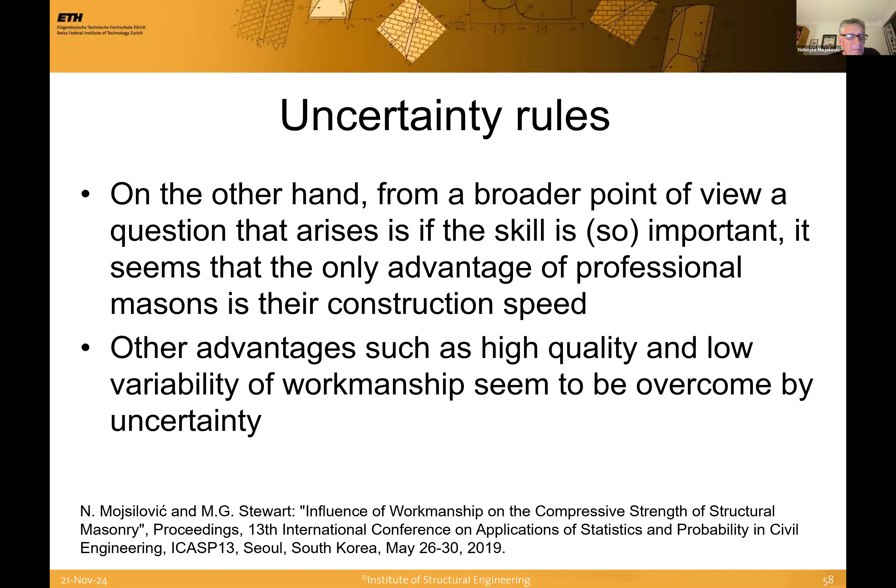One possible explanation for such an outcome could be that professional masons are more consistent in their work, and thus their values are always in the middle. On the other hand, from a broader point of view, the question arises whether skill is so important. It seems that the only advantage of professional masons is their construction speed. Other advantages, such as high quality and low variability of workmanship, seem to be overcome by uncertainty. This is a very interesting thing.

I have only 3 slides left, telling something about hybrid testing. I suppose you know what hybrid testing is - we did that also in some, let's say, two smaller projects in our lab and also theoretically.

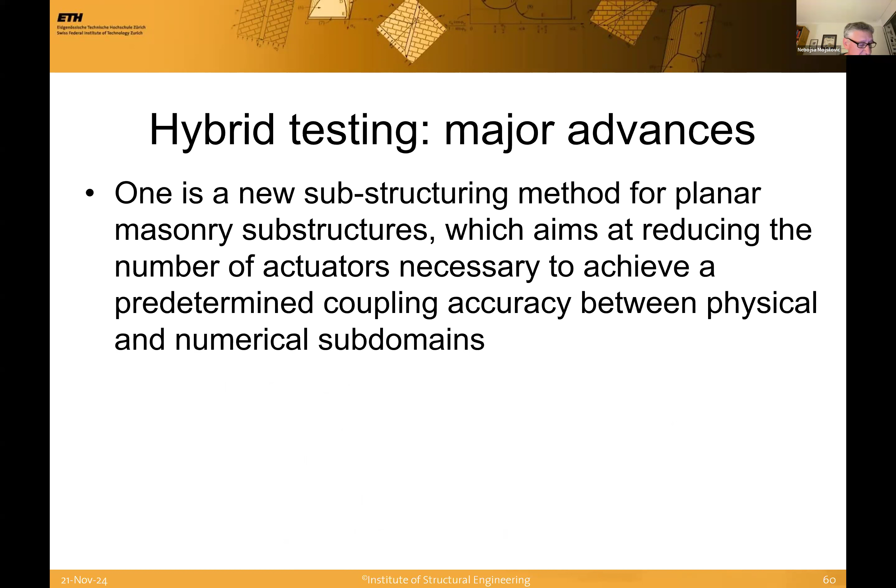And what we found out is that there was a new substructuring method for planar masonry substructures developed, and this aims to just reduce the number of actuators necessary to achieve predetermined coupling accuracy between physical and numerical subdomains. So that was the purely theoretical work, and we also did some testing.

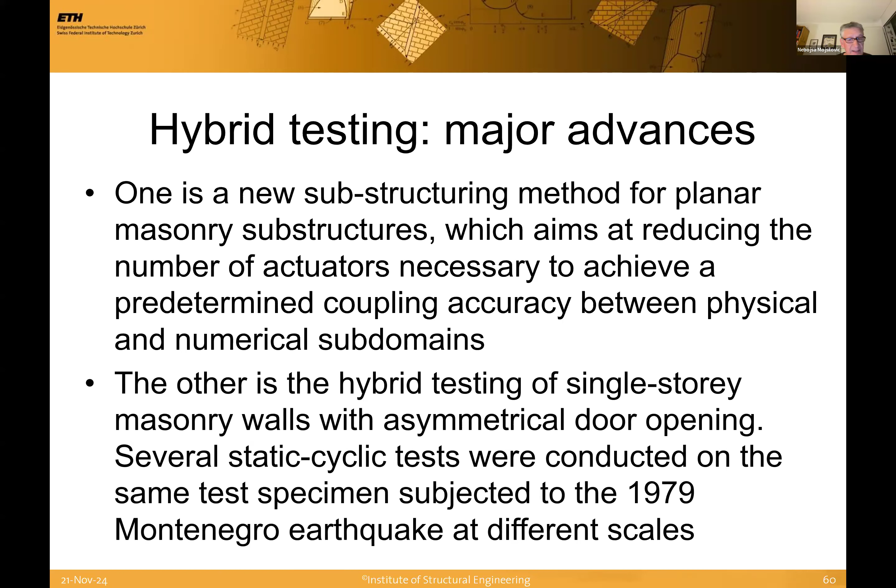We did a hybrid testing of a single-story masonry wall with an asymmetric door opening. We tested it several times on the same test specimen, subjecting it to the 1979 Montenegro earthquake at different scales. This is the isometric picture of the wall.

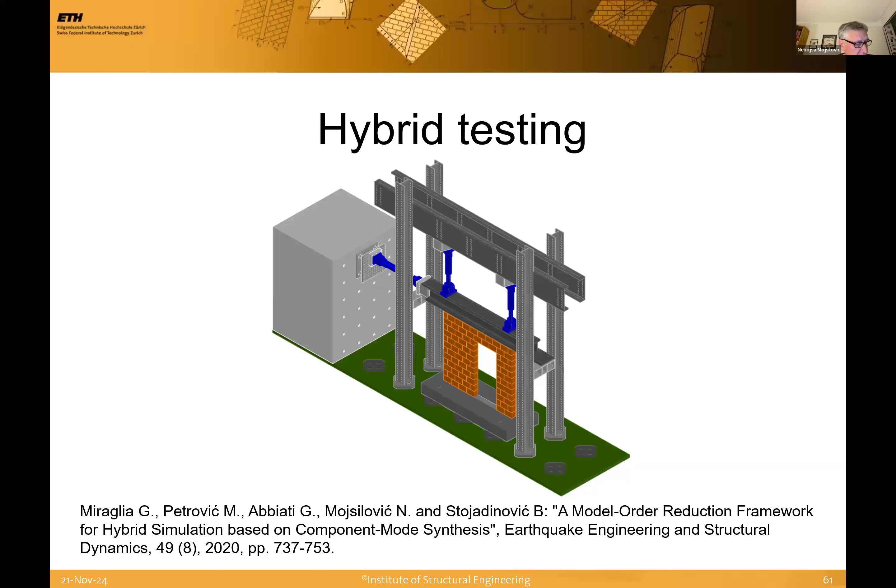That's the same three-actuator setup that we used for other tests. This is the second-to-last slide.

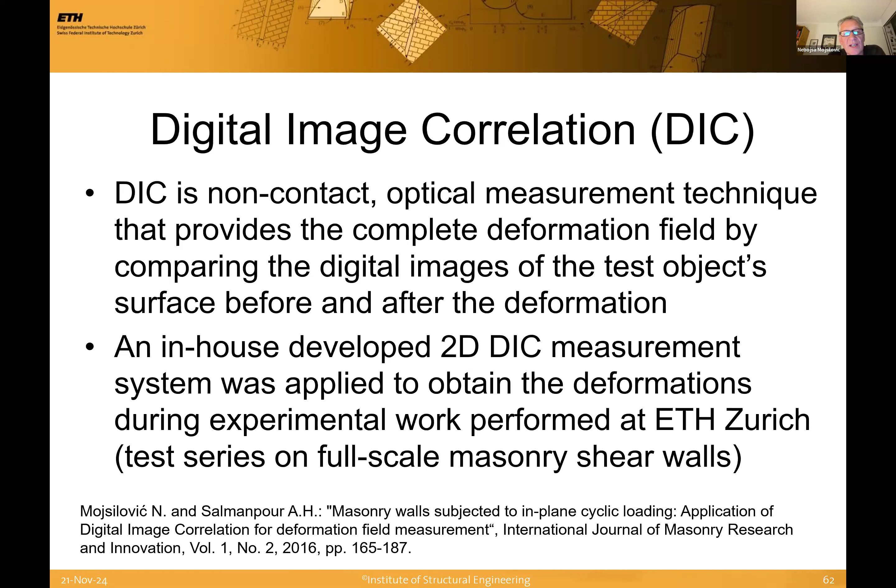We developed this digital image correlation system in-house, and we use it, and we're really very satisfied. In the paper given here, everything is explained in detail. I always get the question, could we forget LVDTs and use only this one? I think we are now at the level where we can just use this digital image correlation.

So thank you for your attention. If you have any questions, I can try to answer them. Otherwise, you can write me an email anytime, this is my email address given here. I'm open for questions and discussions. Thank you.

Thank you, Nebojša, it was a very interesting and comprehensive presentation. I would like to start the discussion now, and I kindly ask the audience to pose a question if someone has one.

Yeah, this is from Zurich. Thank you, Nebojša, we're going to pack up because somebody else is coming to the classroom, but thank you very much. Thank you.

Anyone from the audience, or shall I start, as always, this discussion part? So what I'm interested in is what is the current situation in the design codes regarding this topic. Can you shed some light on the situation in major codes, let's say in Europe, in the US, in Switzerland, of course?

What I'm also active in, actually I'm chairman of the Swiss Code Committee, and we introduced some clauses connected to these layers. As I mentioned before, you can get some loss in strength, vertical strength, if you put these layers, about 10 to 15%. So it's not too bad, if I may say so, because we have the safety factor gamma m in Switzerland, which is 2.0, so it could be covered. But of course the idea of gamma m is not to cover such things, but to cover some uncertainties.